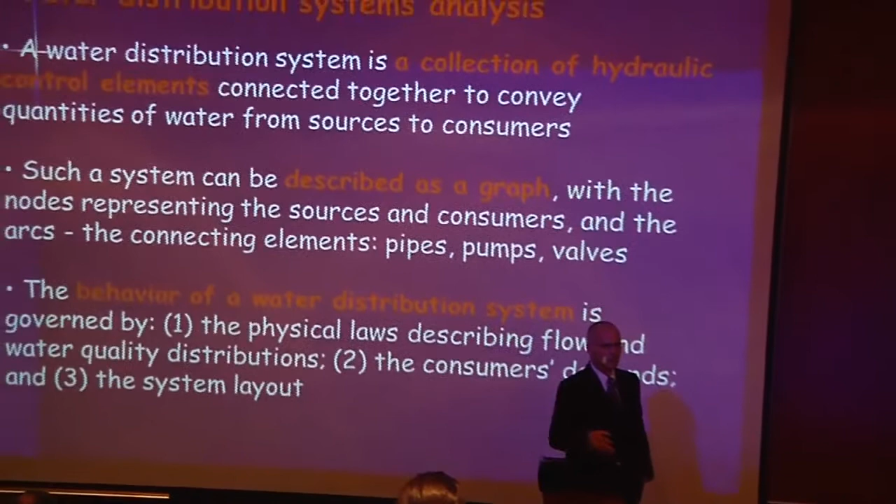If you're thinking about a water distribution system, you can think of it as a collection of nodes and links which are connected together. And this is not just water distribution systems, any system which has nodes and links can be described as what we call a graph. You can think about a transportation system which looks like this, an electrical system, almost any system.

Now, if we think about the behavior of a water distribution system, how does such a system behave? Again, this is also quite general. When we want to model a system, we need to look at the physical laws which describe flow and water quality distribution. When you look at water distribution systems, compare it to an electrical system - you will need to know a little bit about current, voltage, and other things. If you're designing something connected to transportation, you will need to know a little bit about vehicles and loads of vehicles and stuff like this.

The second thing that we need to know when looking at water distribution systems is something about the consumers' demands, which drive the way water distribution systems behave, and we need to know the system layout.

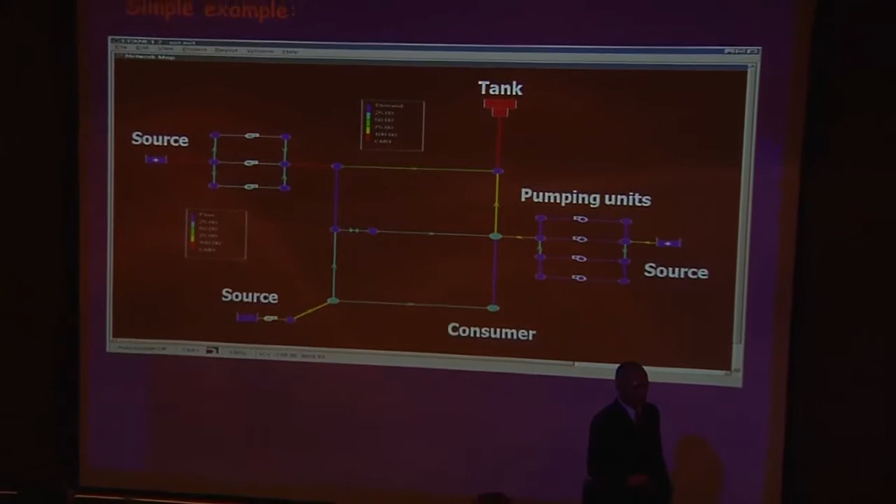Now here is a simple example of a water distribution system, which is very simple, but actually has all the major components that a water distribution system has. So we have here storage, we have here, say, three sources. This, for example, can be an aquifer that is taking water from groundwater. This can be a reservoir, or an aquifer that is taking water from here, and here another one.

We can have a storage tank that fills during low tariff hours and supplies water when tariff hours are high. You can also add reservoirs which supply water by gravity. I was yesterday at the utility supplying water to Bogota, and I'm aware that most of the sources for Bogota come by gravity and by surface reservoirs. So we have pumping, different consumers, and we need to manage this system. Again, that's a toy example, a very small one, but yet quite general.

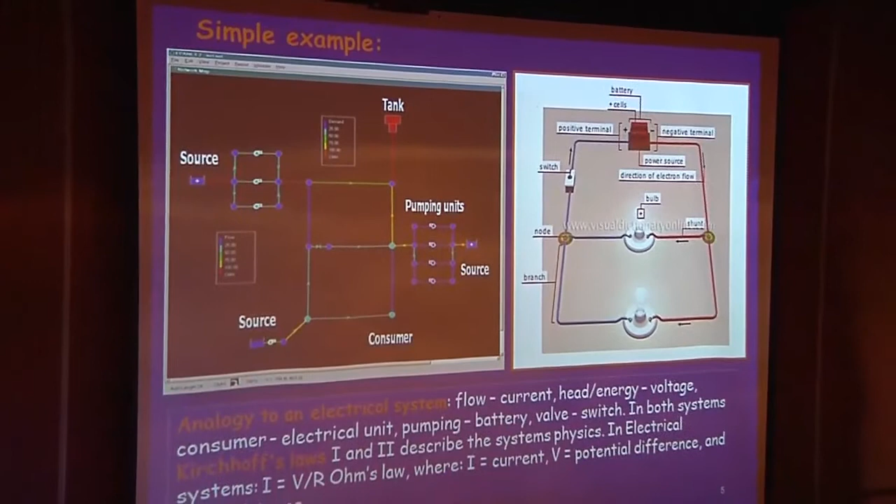Now, if you think a little bit about a water distribution system, and if you think about an electrical system, what's the difference? Why are water distribution systems more challenging to manage than other systems, at least from the perspective that I'm showing here?

First of all, everything connected to flow and head. In water distribution systems, we have the Hazen-Williams equation, or the Darcy-Weisbach equation. Those are nonlinear equations, much more difficult than if you're looking at an electrical system, where we have Ohm's law, which is much easier to incorporate because that's a linear system.

Now, if you want to apply anything on a water distribution system or an electrical system, we need to follow the so-called Kirchhoff laws number 1 and 2, which I hope you remember. One is for mass continuity and one for energy continuity.

So what is the uniqueness or the differences between water distribution systems and electrical systems, for example? Why are water distribution systems more complex? Here you can see there are 3 differences that I'm mentioning.

One is, as I said, the nonlinear head-flow relationship. So if you are looking at the energy in the system, it will go to Q, or the flow in the system, at the power of 2 or 1.852.

We have storage in the system. We don't have storage in an electrical system, at least not the way it's working in water distribution systems, and we have water quality issues. So usually, these days, we are not just looking at problems connected to flow and energy or head. We are also looking at problems connected to water quality, like free chlorine, turbidity, contamination coming into the system, anything connected to the water distribution system, because what we would like to supply is a good service to the customer, which is not just the quantity and the pressure, but also the water quality. That's a prime objective.

Now here's a little bit of a technical figure. What you see here is a very famous water distribution system test problem that was first used by Alperovits and Shamir in 1977. Again, the details are not very important. What you see here is a constant head source, like a reservoir sitting high above ground level. Here you have 6 consumers, and the problem is to design the system at least cost. So you want to know what the pipe diameters should be so that the cost of constructing the system will be minimum, and of course you have different demands in the system.

The system is relatively easy because it has only one source and is fed by gravity. You don't see any pumping here. But if you look here, this is the head at one of the nodes, node I, and this is the other head at node J. You can see here the nonlinear relationship between flow and the difference in heads, and that's the resistance of the pipe, which takes into consideration the pipe diameter, the friction coefficient, and the length of the pipe.

Now, when you look at such a system and you want to design it, to find the optimal solution, flow might reverse. So you might think the flow should go from this node to this node, but when you end up, the flow might reverse. Because of that, you have an absolute value, which from an optimization point of view makes the problem very hard. That is because if you are using any optimization methodology, you might get discontinuities because of this absolute value. Now, what you see here on this figure are two decision variables that we are using, and this is like the response function. So every point here is a possible solution.

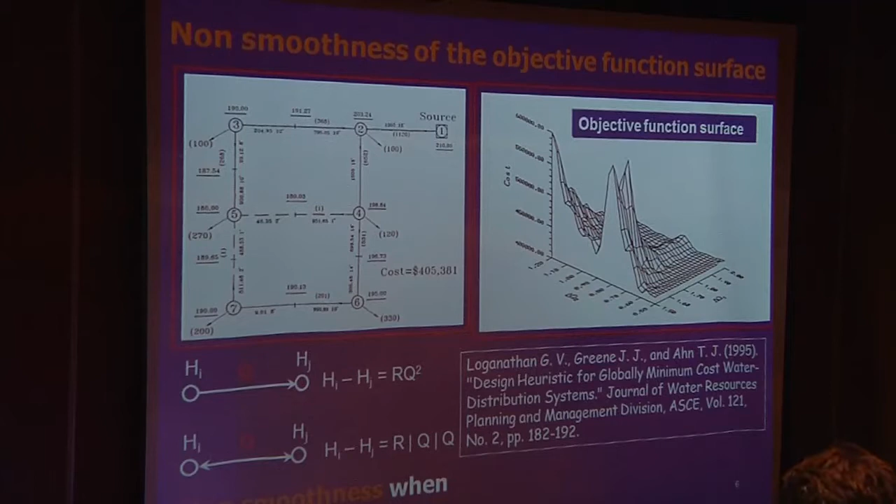Now I'm showing this figure, which is coming from this reference from Loganathan in 1995, Loganathan et al. What I would like to emphasize here is that the surface on which you are looking for the optimal solution is extremely not comfortable. It's not easy. It's like imagine that you are looking here for the lowest value on this surface.

And you need an optimization model that will lead you to that direction. And this is because you have this absolute value here that is connected to the fact that flow might reverse. Now this is only one part of the entire story. The other part is if you're looking at this system and also looking at water quality issues, it's not just that you have an absolute value, you can also have discontinuities. Because if flow is reversing, and this is a set of equations of a mass balance at a node, if flow is reversing, then the entire set of equations is changing.

Now, we would like to do everything. We would like to do flow, we would like to do energy, we would like to know water quality. But this is what we are facing. This is a system that we need to work with. So just to emphasize that water distribution systems management from an optimization point of view, from a more theoretical point of view, is not an easy task.

And because of that, at most utilities, what people are doing - and I was quite impressed yesterday when I went to Bogota and the water utility, and I saw the decisions are being made by results of a simulation model. That's very nice, because a lot of times where I've seen people making decisions connected to water, they make decisions differently. But the fact that you are looking at a simulation model and you say, okay, I would like to do something, what do the simulation models tell me? And you have confidence in that simulation model, that's very nice.

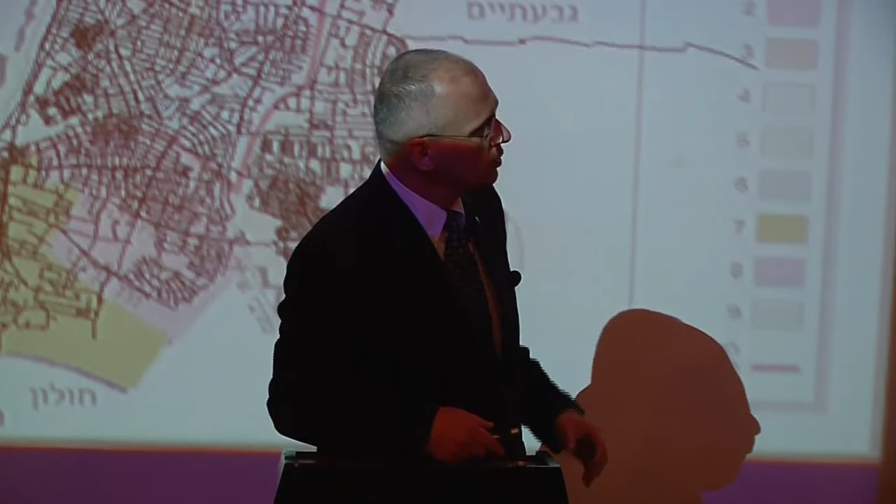This is Tel Aviv, where we did a study. This is about 100,000 nodes and 100,000 links. Now, of course, you don't necessarily need to look at each tap, you don't need to look at each pipe in the system. But those are the systems that we are looking at and we need to manage.

Okay, now this is a very important figure. That's not a technical figure. That's a figure that is actually giving a map, the way that I'm looking at different problems which are connected to water distribution systems. So this is like an overview on what can be done in water distribution systems and what already has been done. And when we come to the end of my talk and talk about challenges, then I will go back to this figure and we'll talk a little bit about challenges, things that have not been done yet on water distribution systems, or where gaps still exist.

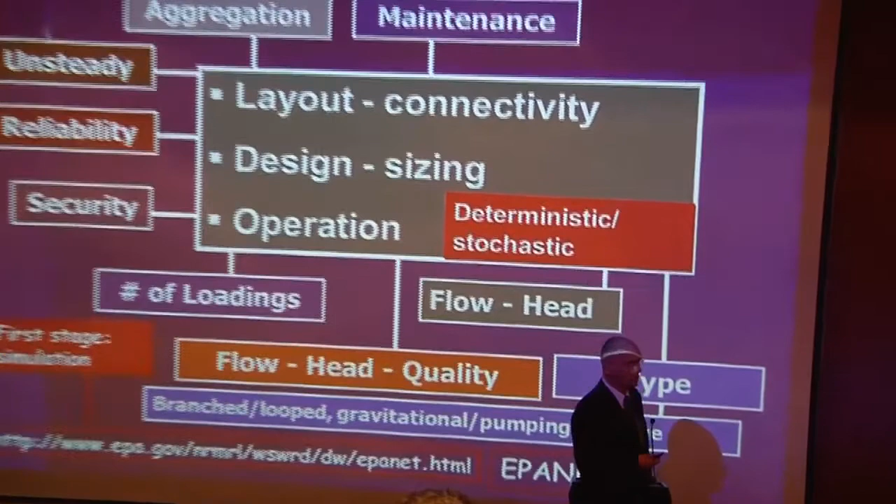Now again, this is from an academic point of view. If you look at people who are doing this in practice, then a lot of things that have already been done in academic institutes still need to be absorbed in industry. And it takes time. One of the things that water utilities have, they're extremely conservative, and that's okay, because they are responsible for supplying water at adequate pressure and water quality. And once a decision is being made, that's not a game. I mean, you're supplying water, which is a very important commodity.

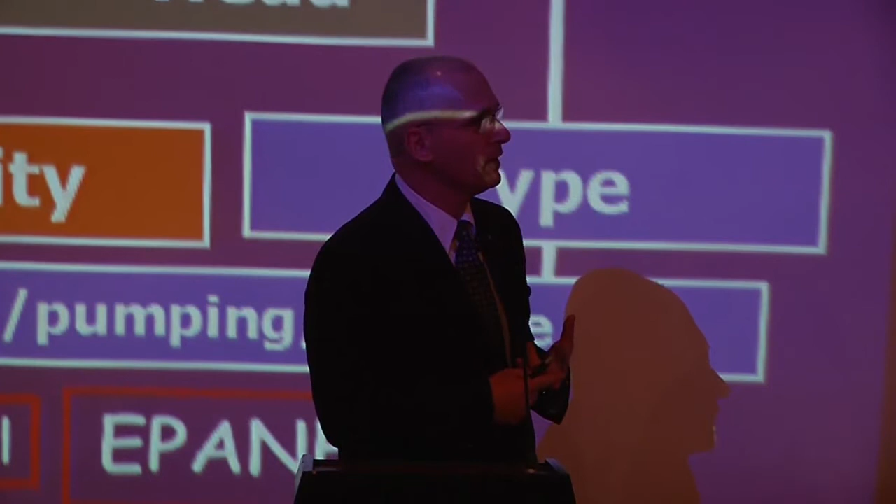That's obvious. Okay, now if you look at this map, I'm partitioning this map into three sections. One is problems which are connected to layout, connectivity - which node should be connected to which node. So if you have a water distribution system and you want to extend it, then the problem is connected to layout. Once you have the layout of the system, you need to decide on designing the system. What should be the size of the pipe? What should be the maximum power of the pump? And if you have a tank, what should be the volume of that tank? So you need to size the system. And after you do sizing, you're thinking about operation - how are you going to operate the system?

Now, when you operate the system, and when you're designing the system, it's not just cost. Most of the time, cost is not the most important issue, because it's not just a problem of cost. Most likely, the main thing you need to cope with is reliability. How do you supply water reliably? How do you construct and operate a water distribution system in a reliable way?

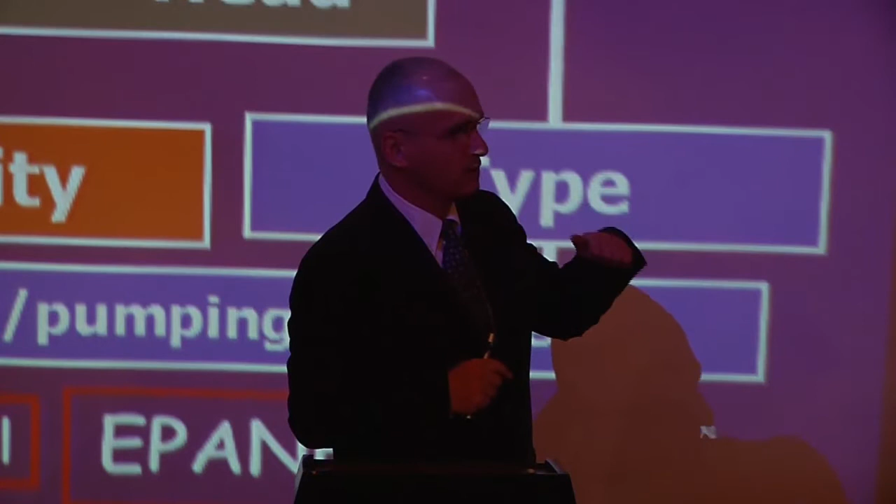So those are the three levels. In reality, there is only one level, everything is connected together. But if you want to think about it as having layout, design, and operation, then it's easy to memorize it this way.

Now, if you're looking at all these three problems, there are different problems adjacent to it. We'll come in a moment to deterministic and stochastic. You have problems connected to flow and head. You want to supply adequate water demands at minimum pressures.

You have different types of water distribution systems. You can have systems which are branched - if you have agriculture, you don't need any loops in the system. Branched systems are very cheap because you don't have loops. But if you're looking at an urban water distribution system, you need loops because you need the ability to supply water to consumers from more than one direction. So systems might be branched, they might be looped, they might be gravitational, just fed by gravity.

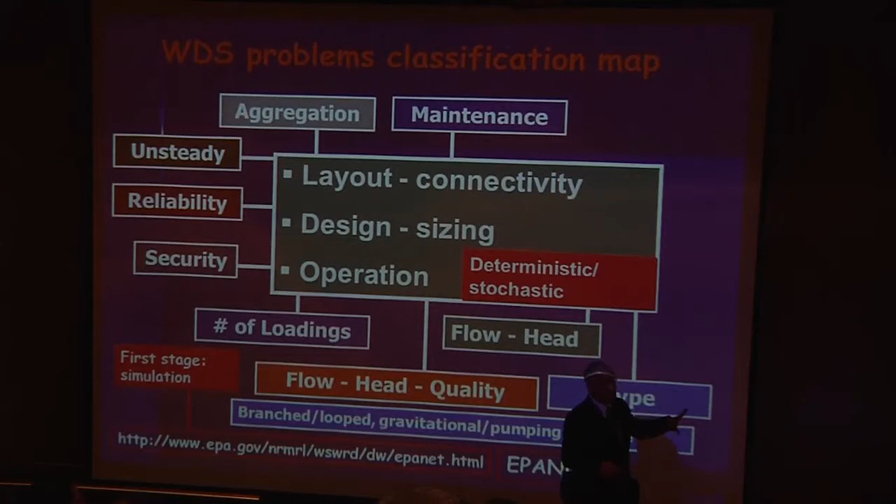And they might have pumping, and they might have storage in the system itself or not. It depends - for example, the water distribution system in Tel Aviv has no storage in the distribution system itself. Everything is supplied by gravity out of the system, and there is no storage within the system itself. So it depends, you can cope with different types of water distribution systems that have these categories.

Now, you can look at flow and head. You can add also water quality. As I said, nowadays we are looking at flow, head, and water quality. The water quality that is supplied is a prime issue to consumers.

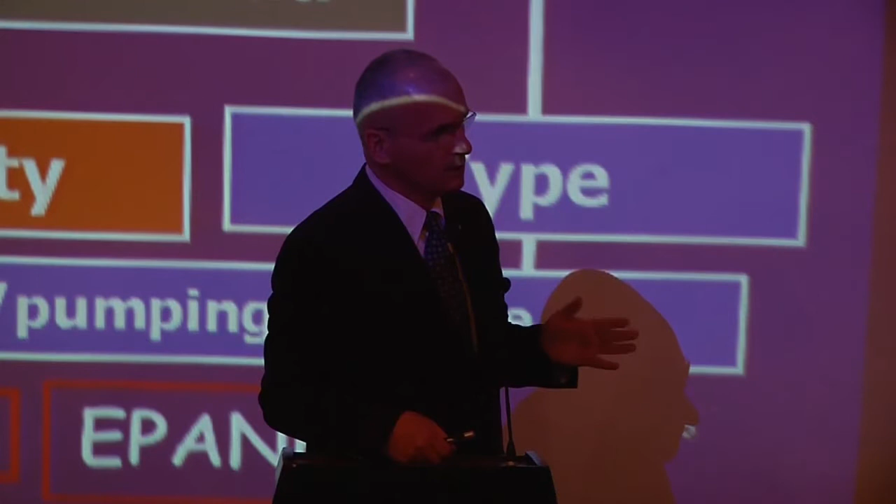You can look only at one loading condition. For example, most design, when looking at a master plan, pipes are selected by looking at just one or two loading conditions - an average loading condition or an extreme loading condition - assuming that if the system works for extreme loading conditions, it will work under any other condition. This might be true, but sometimes it's wrong. So it depends how many loading conditions you take into consideration. Now people are looking more at the so-called EPS, extended period simulation, which looks at loadings changing over time. So the number of loadings, you can take one or more.

Now, what you see here are different problems connected to water distribution systems. Maintenance - which pipe are you going to replace and when? What are the priorities of maintenance? What type of maintenance are you going to do in the system? Yesterday, when I was in Bogota, I've seen that - that's a big problem. What priorities are you going to place for maintenance? What pipes are you going to replace? What pipes are you going to strengthen, like doing a parallel pipe to an existing one?

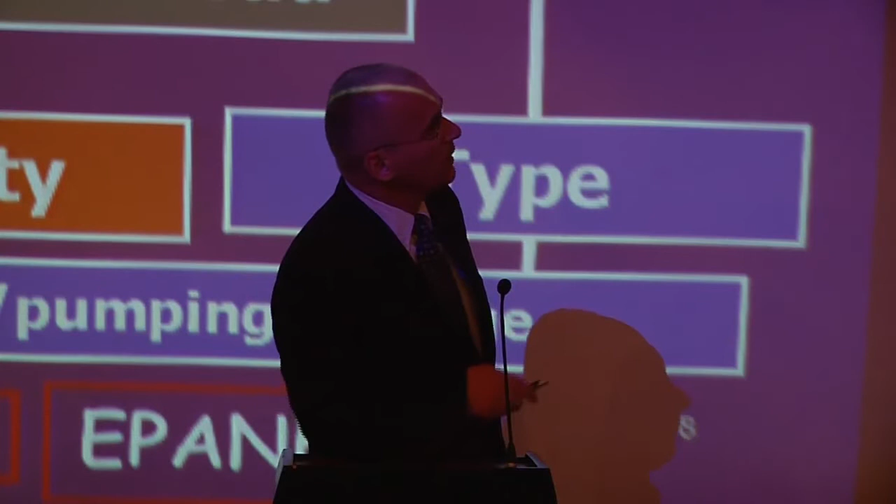You have problems connected to aggregation. So if you look at the Tel Aviv water distribution system, you have 100,000 nodes and 100,000 links that we have modeled. But do you really need such a detailed model? Perhaps you need a model which is much more aggregated, much smaller. It depends what you want to do.

If you want to do, for example, an optimal operation model, then perhaps it's not very important to look at each tap. But if you look at a water security problem connected to contamination moving in the system, then it might be very important to do a very detailed model. So aggregation is another problem. We'll come in a moment to this one.

Reliability - how do you supply water in a reliable sense? How do you define reliability? We'll come to this in a moment with one of the examples. And of course, reliability and cost are two competing objectives. Obviously, if you get a system with minimum cost, it will be the lowest in terms of reliability.

If you are willing to have higher reliability, you need to invest in extending capacity. If you want to extend capacity, it costs money. But then the system becomes more reliable.

Another example is storage tanks. Tanks need to fluctuate between minimum and maximum, but if you look at how systems actually operate, tanks are not fluctuating. They're not fluctuating because operators like to have the tanks full, because if something happens, they have a backup.

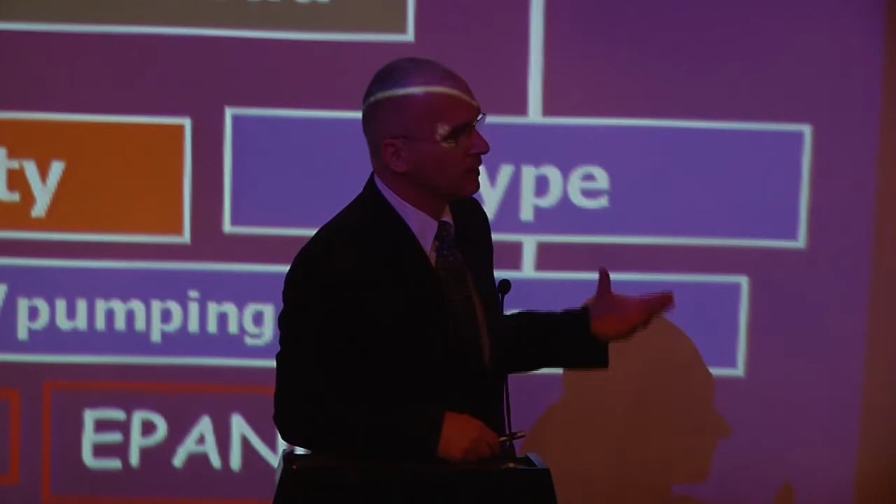Security, water security, is driven to some extent—perhaps the most important driving factor—by the 9/11 events. And people have started to worry about what's going to happen if a contamination might enter the system, either deliberately or non-deliberately, just accidentally.

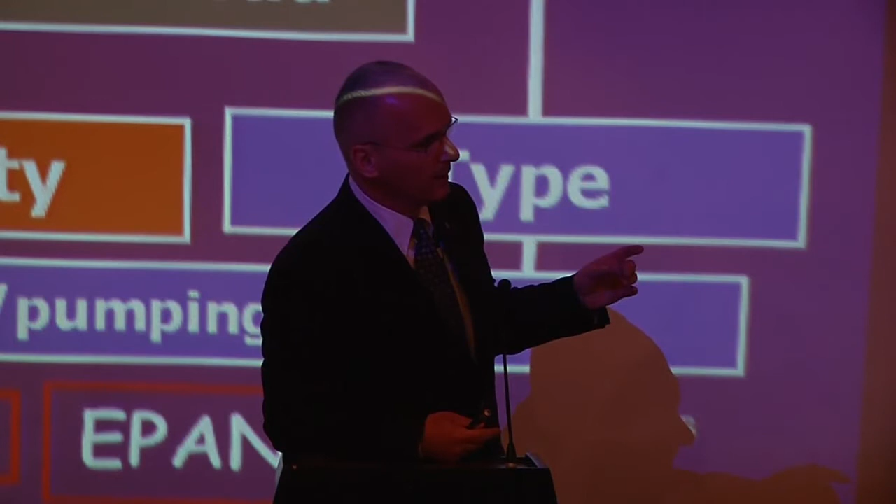In Israel, for example, there are a few examples of contaminants that have entered the system, not deliberately, but accidentally, and still it happens. For instance, there was one case in which fuel had to be filled into a specific tank, and the operator selected the wrong connection. So instead of filling the fuel tank, he injected fuel into the distribution system, and people started to feel that they were drinking water with fuel. That was really a proof of concept. Anyway, this is connected to security.

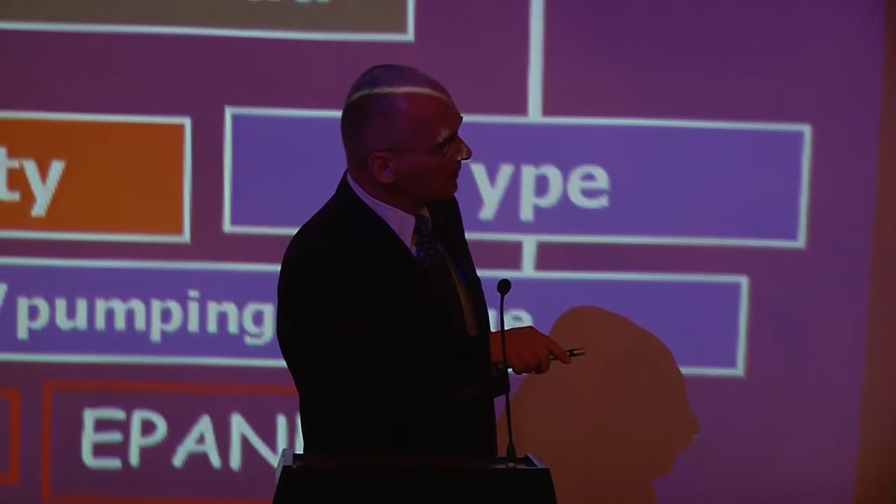Now, all the things I've said here are connected to deterministic assumptions—that you know the demands in the system, the consumptions. But you don't really know the consumptions, you just know them in a specific range. One other thing that's missing here is leakage, which doesn't appear in this picture. That's also a problem, or non-revenue water, which can be managed by different activities, like managing pressures in the system and doing valve closures or valve operations, and things like that.

But going back to this, the assumption is that everything is deterministic, when in reality everything is stochastic. You don't know exactly what the demands are, you don't know exactly how consumers are going to react. So if you want to take those into consideration, things become much more complex if you want to manage a water distribution system.

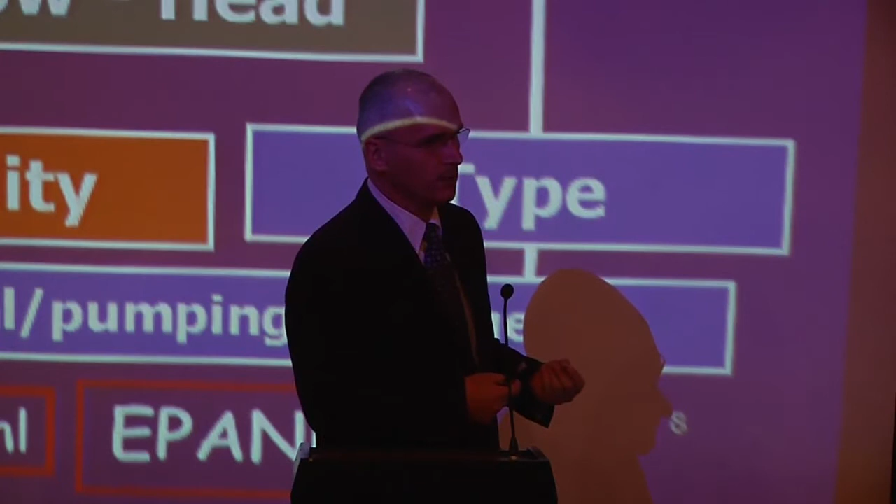Now, the first thing you must be able to do, no matter what system you're looking at—a transportation system, an electrical system, a building, whatever—is to simulate the system. So if you look at different scenarios, like replacing a pipe, or suddenly there's a burst in one of the pipes and it breaks, you need to be able to simulate the system. Reliability, for example, is incorporated in practice by looking at different scenarios: what's going to happen if that pipe breaks, how the system is going to operate. So what you do is simulation.

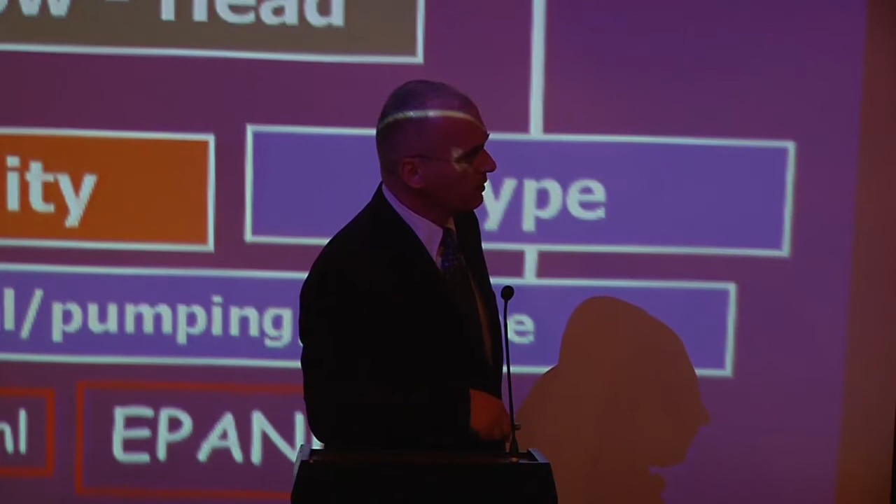So you're doing simulation, and there's no way to talk about optimizing a system if you're not able to simulate it. Optimization is not something I'm necessarily advocating. What I'm trying to say is that if you have a problem with a set of solutions you can enumerate, you don't need any optimization—just look at all the solutions and select the most appropriate one. So you need to be able to do simulation, and this is just one reference, EPANET, which became very famous since it was established in the early 90s.

So that's a major program, freely available and very, very successful.

Now, this is a map of different problems connected to water distribution systems. Now we have those problems. How are we going to solve them? What I'm referring to here is problems that we would like to optimize, to do some sort of optimization.

When we look at a problem where we're optimizing something, we have an objective function that we are trying to minimize or maximize. We might have more than one objective function if we're looking at a multi-objective problem, like reliability and cost. And we have a set of constraints that we want to fulfill.

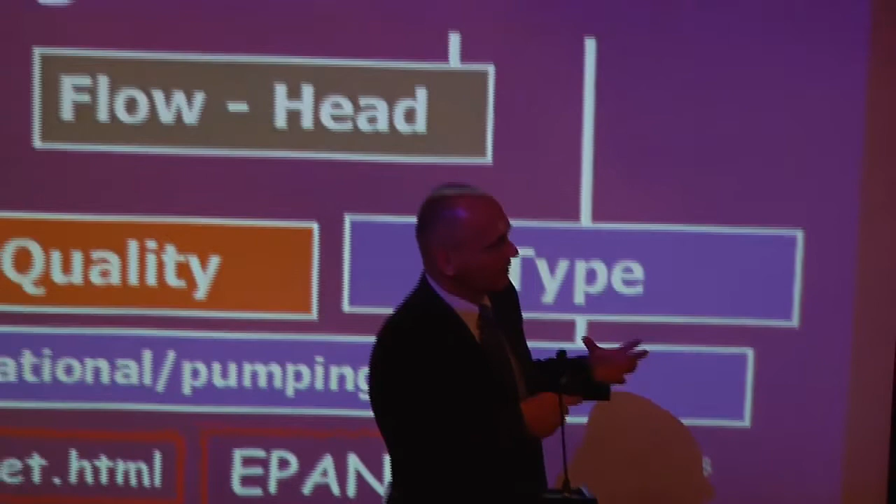So how can we do this? Here are three methods, or three category methods, that I will focus on with the examples I'll show. The first one is embedding.

If the problem is really simple, you can simply write a linear programming model. A linear programming model means the objective function is linear, all decision variables are at the power of 1, and you have a set of constraints which are linear equations. LP, or linear programming, is extremely popular, extremely efficient, and if you have a problem that you can cast into a linear programming model, then that's great. Do it, and you have a very efficient way of solving it.

For example, the problem of least cost design whose layout is branched can be embedded as a linear programming model. This goes back to 1968 — there's a famous paper by Karmeli et al. that invented this idea.

The other thing which is very popular now is the so-called linking. What do we do in linking? We have two stages. One stage is simulation, running different scenarios. At the upper stage, we have a heuristic methodology — people have been using genetic algorithms a lot since around 1994. Those two levels talk with each other.

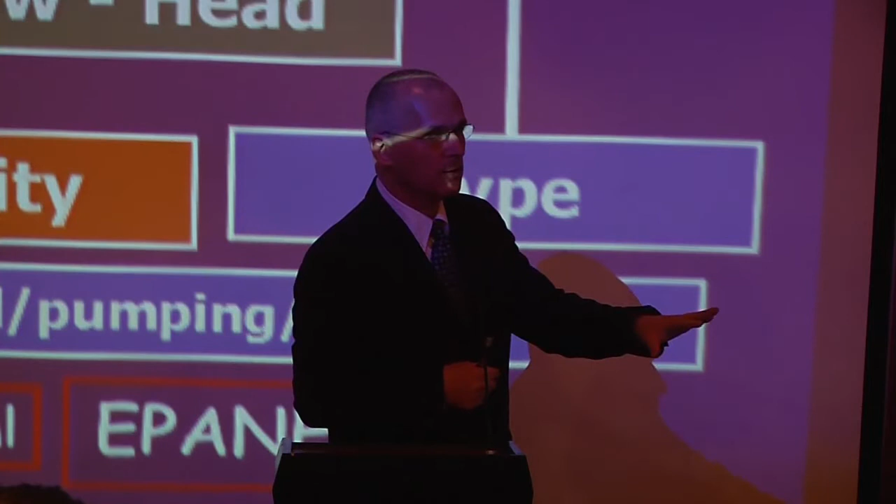On the other hand, which is worse, is that everyone doing a genetic algorithm is a bit neglecting the thinking on how to solve it using an embedding approach. Hybridizing is just a way to try to simplify the simulation stage.

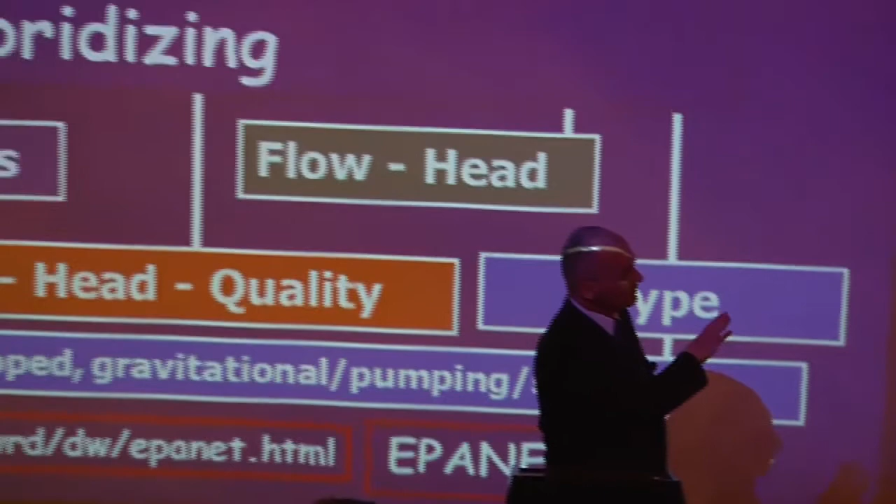So I think this slide is probably the most important one in my talk, and if you observe some of it, then I've done my job. Okay, so that's a map.

I will show now 3 example applications that try to demonstrate parts of what I've shown here. Excuse me.

Anyone interested to see a bit more than that, just a moment. If we go back to this example, I was engaged in almost everything connected here — for instance, aggregation, number of loadings, flow and head, water quality and aggregation, everything. I haven't done anything on maintenance, but I've done unsteady reliability and a lot of things connected to security.

So what I'm trying to say is I've selected 3 example applications that will demonstrate some of the things I've shown here. But if you want, just go to my website — there's a list of 87 journal papers. You can go there and pick any one to look at, and everything is open.

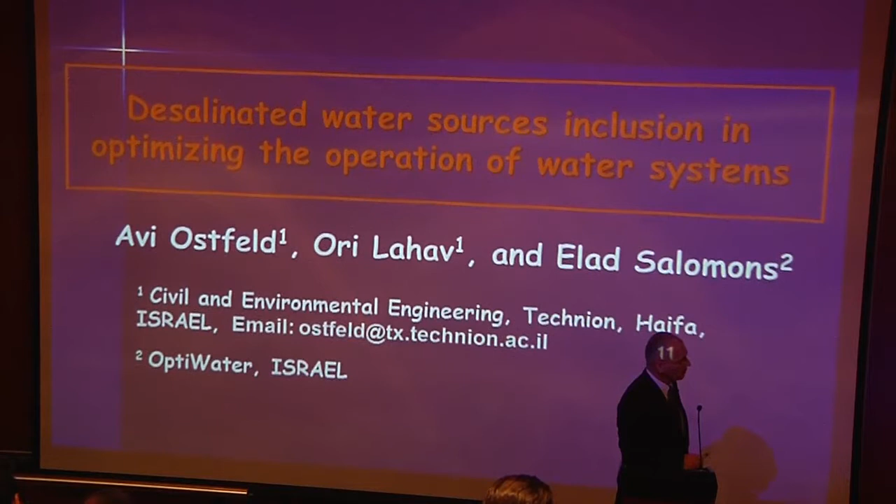So this is me. I would like to acknowledge Ori Lahav, a faculty member in civil and environmental engineering, and Elad Salomons, who is working with me for quite a while, a private consultant. If you want to look at more details, this is the reference you need to read.

A little bit on introduction, objective, decision variables, constraints, methodology, example application, and conclusions. Now, this presentation and the 2 others that will come afterwards are to some extent technical. All the technical issues I will leave aside, I will skip them. We'll look at them just in a glance and keep moving forward, because those are technical things. Anyone who wants to look at those more in depth can do so, but that's not the most important thing.

So in terms of introduction, what are we solving? The problem here is the following: you have desalinated water on the shore, you have surface water, you have groundwater, and you're mixing them in the same water distribution system. Because of that, you might have very difficult, very severe problems which are connected to water quality, not connected to contamination, but connected to water quality issues because the stabilization of the water is different.

Water that is coming, desalinated water, has almost no minerals. On the one hand, groundwater and surface water has different properties, and when you mix them, you can have the so-called red water.

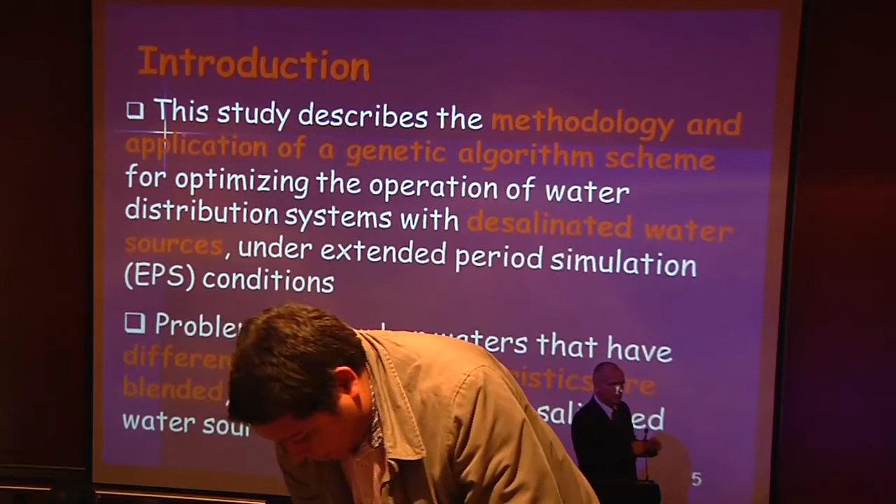What is red water? I think that all of you have experienced this. If you go out of your apartment and come back after a vacation or something, and you open your tap and you have that brown water coming out, that's red water. Because everything that is attached to the pipe, or some parts attached to the pipe, goes into the water fluid and comes out at the tap.

So problems occur when waters that have different chemical characteristics are blended, and especially when desalinated water sources are present.

What has been found is that what we need to take care of, or what characterizes the stability of water, is the so-called CCPP, or calcium carbonate precipitation potential. That's a chemical property of the water that we need to control to be at a positive level. And when desalinated water is blended with groundwater, even if both sources have a positive CCPP value, you can still get the phenomena of red water.

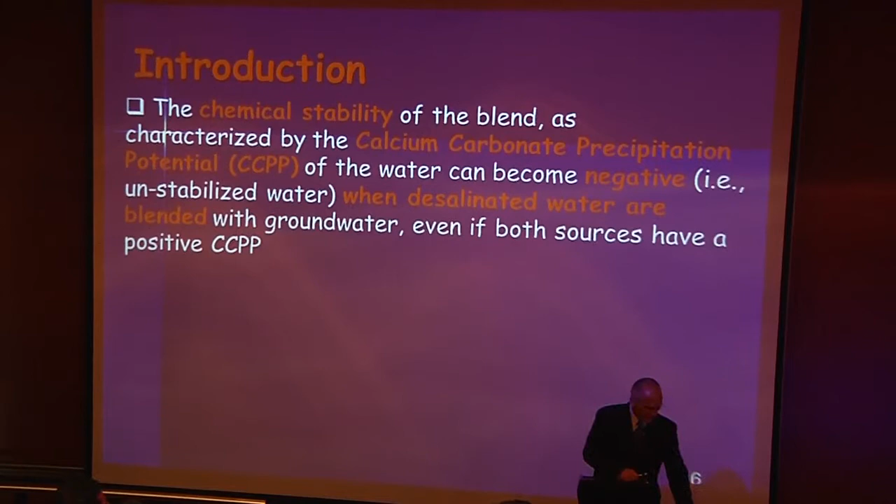So that's the phenomenon of red water that I just mentioned, and we would like to control this. We built a model with the following objective, decision variables, and constraints, and we solved an optimization model.

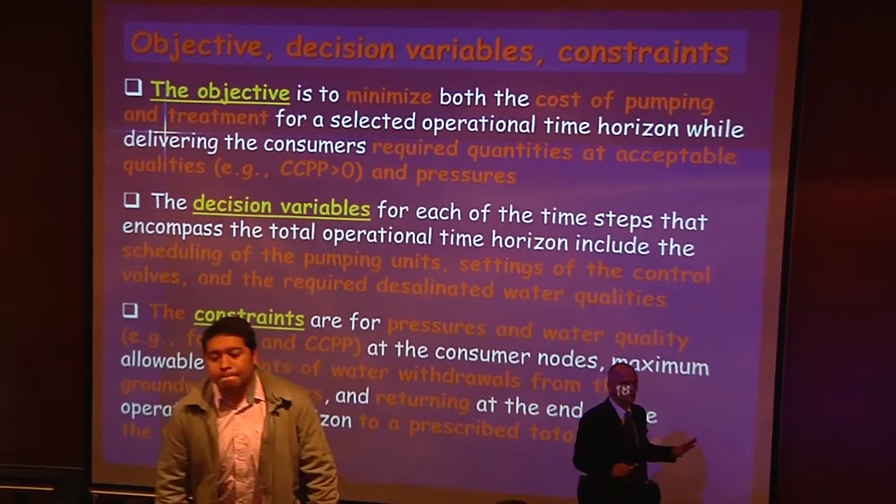Now, what I'd like to emphasize is that even if you're not solving an optimization model, if you're just doing simulation, think about what you want to accomplish, what are the decision variables. For example, I'd like to accomplish reliable water supply to consumers. What are the decision variables? Where to place new pipes and how to operate the valves. What are the constraints? I need a minimum pressure at specific nodes in the system, and I need to maintain a minimum water level at the tanks. If you think along these lines, it makes things easier to absorb and creates order in the way you think about problems.

Going back to this problem, the objective is to minimize both the cost of pumping and treatment, while looking for a positive CCPP. Decision variables are connected to how you hydraulically operate the system, and to what extent you treat the water at the desalination plants. Constraints are connected to pH and CCPP, which assure water quality that will not cause red water problems. We also have constraints connected to the hydraulics of the system, that is minimum pressure and levels at the tanks.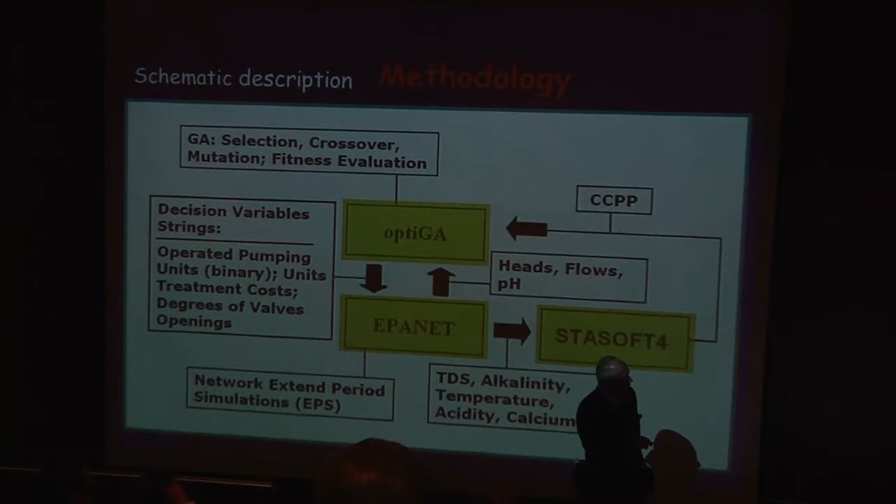For example, OptiGA, the genetic algorithm, gives the simulation different operating pumping units - a binary of which pump operates at which time, the unit treatment cost, degrees of valve opening, and things like that. EPANET gives back the solution, and OptiGA gives down a new set of decision variables.

This software, STASOFT4, simply does the chemical analysis, and we'd like to maintain CCPP and pH. If we get solutions that are not feasible, not fulfilling the constraints, we give them a penalty. This is extremely typical in solving complex water distribution systems, and there's already available software for doing this, because it's extremely robust in terms of receiving solutions. But again, the price is the computational effort.

Now here are just two screens of a program we developed for doing this - the genetic algorithm inputs and the way that the problem looks like. Not very important.

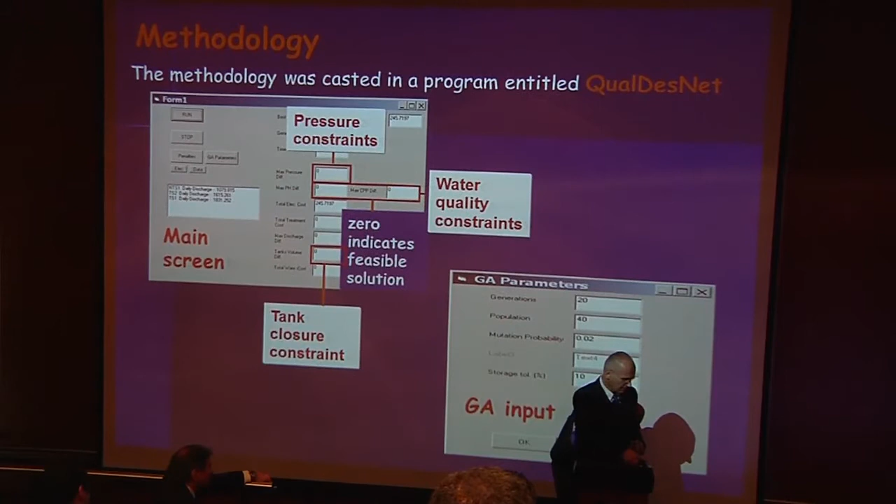Speak slower? Okay, let's see if this is working. Let's continue. I've never felt so important, I must admit.

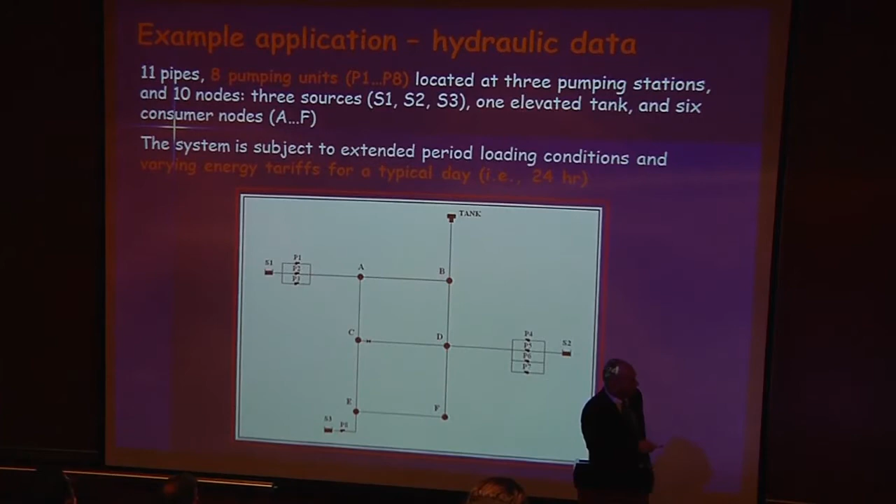So what we have here, this is the main screen with different water quality constraints, and this is a genetic algorithm. Here is an example application - you see it's a small example. We have three pumping stations here, and six nodes. That's not a real water distribution system, but it captures the idea of incorporating everything.

We have here three sources with three different water qualities - this is like a groundwater source, this is a desalinated source, and this is a surface water source. Again, those are technical details connected to the running, which is not very important.

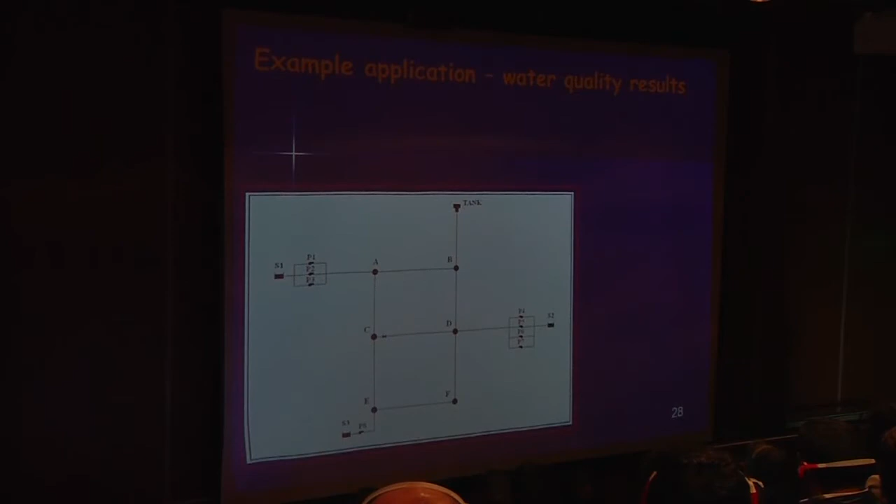This is the water quality. Here you see this is CCPP, one of the water quality parameters, and you can see that you will receive minimum CCPP values. So those constraints are binding.

We'll come to this in a moment because this is again very important. We are doing sophisticated optimization, genetic algorithms, ant colony and other things. But again, we are solving engineering problems. Now, how can we know that the solution we are receiving is optimal? The answer is we cannot. We cannot know that the solution is really optimal from a mathematical point of view.

But is it really important - the answer, in my opinion, is no, it's not really important. What is important for us is to improve existing solutions.

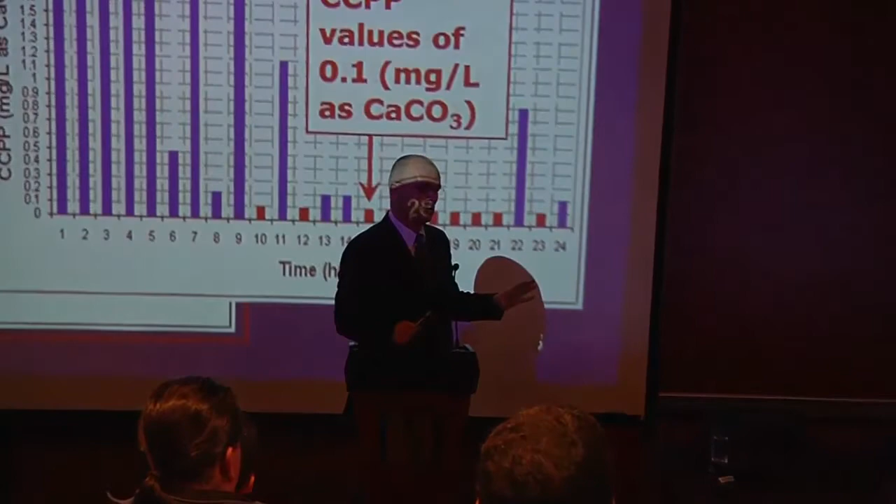So if you have a water distribution system that is pumping - there is an example in Israel - water is pumped from the shore to Jerusalem, and the elevation is really high, about 400 or 500 meters over a very short distance, and energy is really a high issue. So if you're able, through optimization, to reduce the amount of energy you're consuming just by 4 or 5%, then you're saving lots of money.

Is this really an optimal solution? Who cares? You're saving money. So that's very important in the way one should think about solving these types of problems. Now, how can we say or know that a solution is good? There are different heuristics that I've written here, the way I'm looking at this, which can give you a clue whether what you are doing makes sense or is correct.

The first one is to be very close to binding constraints. Here is another example: if you have a problem of minimizing construction cost for a water distribution system, and you have constraints on pressures at nodes, at least at one of the loading conditions, at least at one of the nodes, you should be very close to the minimum pressure.

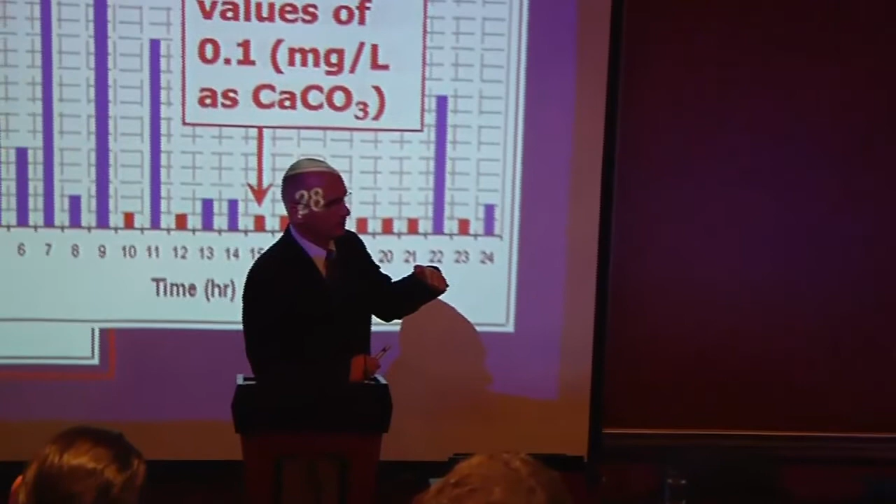If you are not close to the minimum pressure, that's fine - you have a feasible solution, a solution that will work. But is that solution going to be minimum? Probably not, because if you have a pipe which is very large, if you reduce the pipe a little bit, you will increase the friction losses, you will get a reduction in pressure, and the entire system cost will reduce.

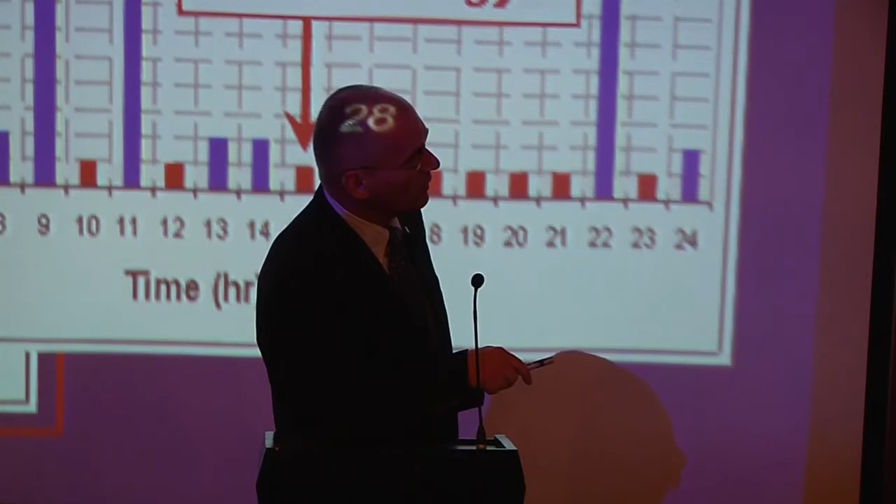So proximity to binding constraints is very important. Now, the other thing is the way the solution is behaving. If you look on one hand at the objective function, and on the other hand at your iterations, or the so-called generations in genetic algorithms, solutions usually progress not in a continuous way, but in a stair-like case. So you need to see if this is the way it works for you.

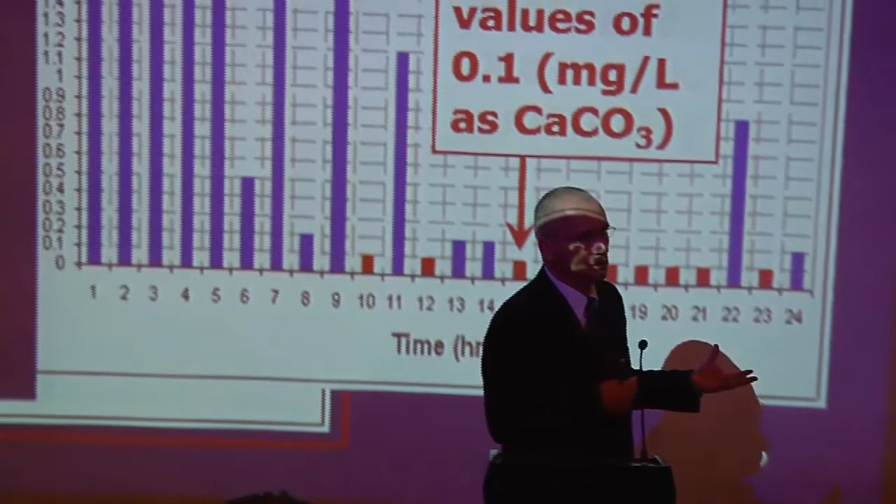The other thing is converging to the same local solution at multiple runs. So you can run the model once and again and see whether you are always approaching the same solution, or a nearby solution. This can give you confidence that what you are doing is correct.

Proximity to boundary constraints, we have already mentioned. And very, very much important, the last point here, which is engineering judgment.

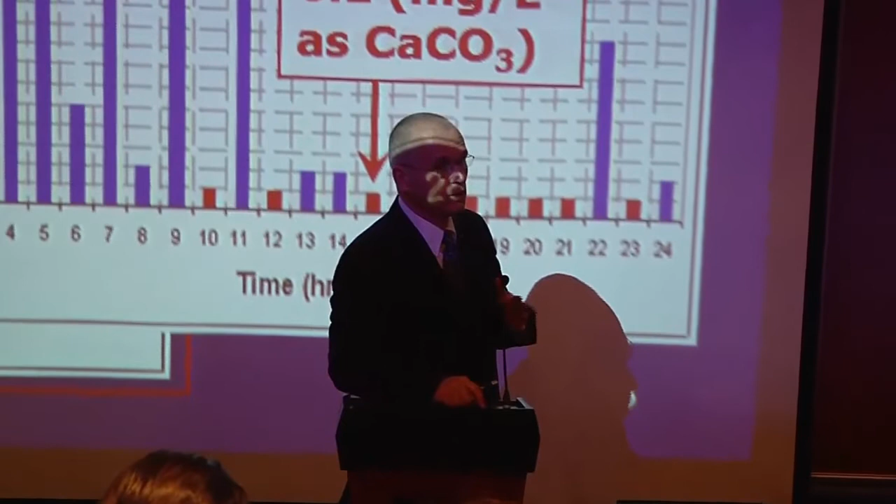Just look at the solution and see if it makes sense. Sometimes the optimization doesn't look at everything in series, we cannot look at everything simultaneously, we're just looking at one problem. But if you cast an optimization model and everything is solved simultaneously, the optimization model might lead you to solutions that you have not been thinking of. On the other hand, you might have an error in the model. So engineering judgment is extremely important here when you look at the final solution.

Okay, so in terms of conclusion for this example, that's just an example of looking at water quality problems, injecting water quality connected to water sources with different water quality stabilities, and trying to solve a model which incorporates everything, the hydraulics and water quality, in one framework.

So that was example one, and we have done different cases. What I've shown here is just one case we've implemented in another water distribution system, and it's open to anyone who wants to use it as a model to balance between water cost and water quality. So this was example number one.

Now we are moving to example number two. Example number two is connected to reliability of water distribution systems. So this is the title of this talk, but the main issue is connected to reliability, which is a very complex problem still. It is complex even from the beginning.

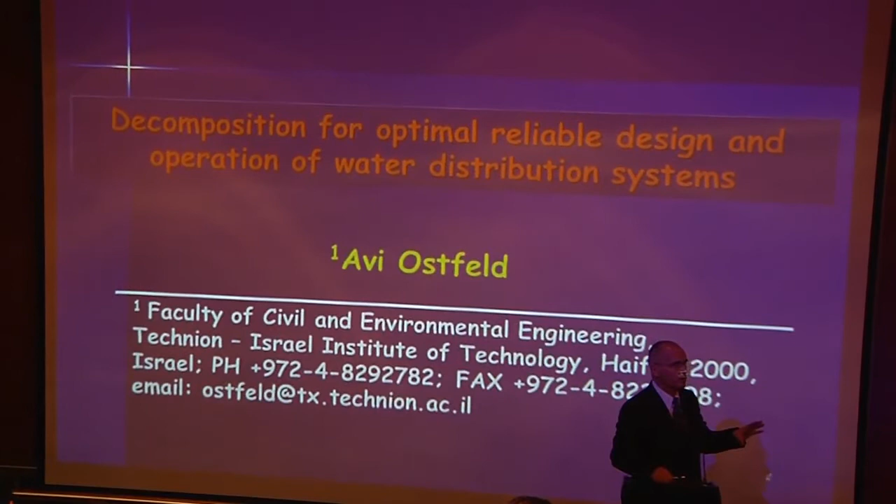How do you define reliability? What measures are you going to take into consideration? If you have a measure of reliability, how are you going to build a model that will fulfill that reliability measure?

For example, say the reliability of a water distribution system is that you are guaranteeing the consumer no more than 2 hours of shortage in a year with a probability higher than 0.98. This is like a return period in hydrology, if any of you are familiar with that. So say this is a measure of reliability that everyone is happy with.

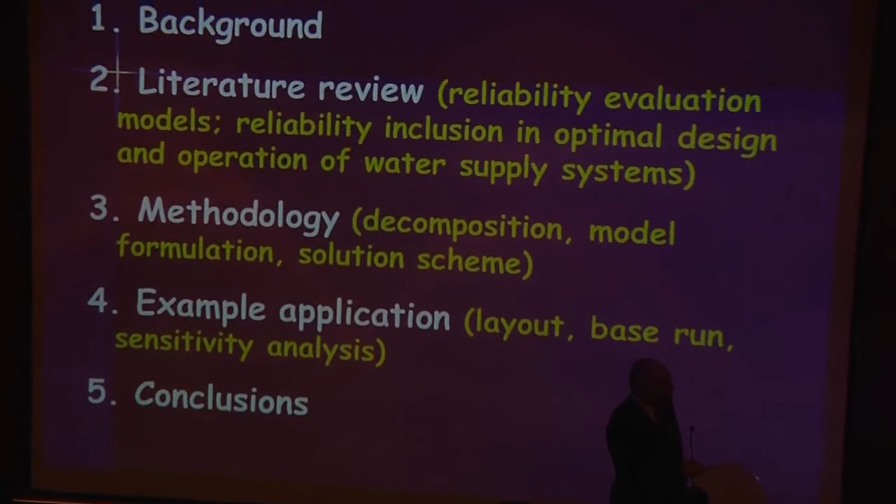How are you going to implement that? That's a problem. Here is the reference for this paper, published in Water Resources Research. Again, if you want to look at all the technical details, they are sitting here. So here, a little bit of background, literature review, methodology, example application, and conclusions for this example.

As I said, reliability is a probabilistic measure of system performance. People will say the system is highly reliable, but if you talk to them a little bit more and ask what do you mean by reliability, it's always a problem. The challenge is to transform that general definition or measure of reliability into computational tools that will be able to solve problems and maintain a reliability measure.

In terms of literature, there are two types of models that have been evolving connected to reliability. One is reliability evaluation models. Remember, when we started, I said you cannot do any optimization if you're not able to simulate the system. So reliability evaluation models are models trying to simulate the system in terms of reliability.

Generally speaking, if you want to know if the system is reliable or not, you need to run a lot of randomization or Monte Carlo simulations and see how the system is working. In practice, what people are doing most likely is looking at different scenarios, the most critical ones, and seeing whether the residual capacity, what is remaining from the system after something fails, is still able to cope with consumer demand. So those are reliability evaluation models.

The other thing is, once you have reliability evaluation models, how are you going to incorporate them into design, into least cost optimization models for design of water distribution systems? So in terms of reliability assessment or evaluation models, those are references, again, if you want to have a look or look at those more closely.

Analytical methods are connected more to the probability of two nodes being connected. But in a water distribution system, the fact that two nodes are connected is only a necessary condition, not a sufficient one, because even with a connection you might not have the hydraulic tools to supply water—the head at the reservoir might not be at the right level, or the pumping unit might not have enough capacity. So it's only a necessary condition. In electrical engineering or computer science it might be necessary and sufficient, but in water it's not.

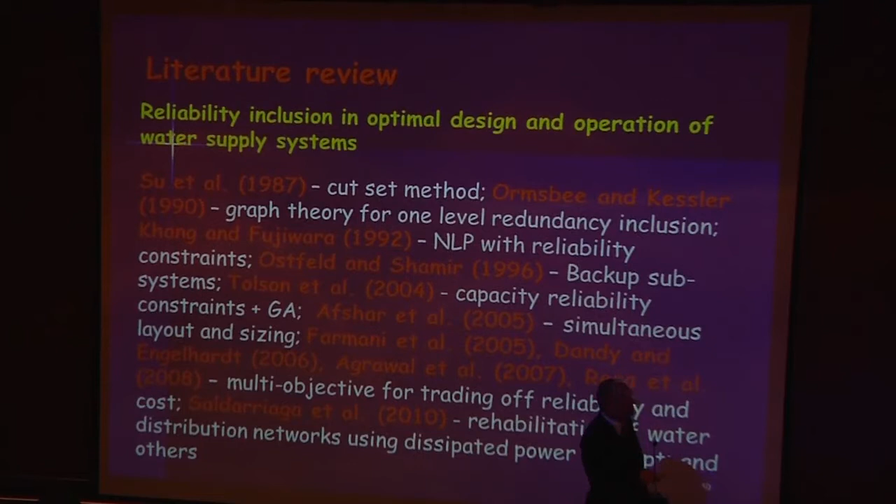For example, there's a multi-objective approach by Reca et al. 2008, trading off reliability and cost. Saldarriaga et al. 2010 connects reliability of distribution networks using a dissipated power concept, and there are others. The literature is full of reliability models.

Now, what is done in practice in terms of reliability? As you know, reliability is still guaranteed by using pipes larger than a minimum diameter, keeping storage in tanks above a specific level, having extra storage capacity, and having extra connections. But there is no explicit inclusion of reliability using these heuristic methodologies.

So what has been done in this model is to incorporate the so-called topological redundancy with residual capacity. The idea was simple: if you look at a water distribution system and impose a load on it, what is the load? The load is the demand.

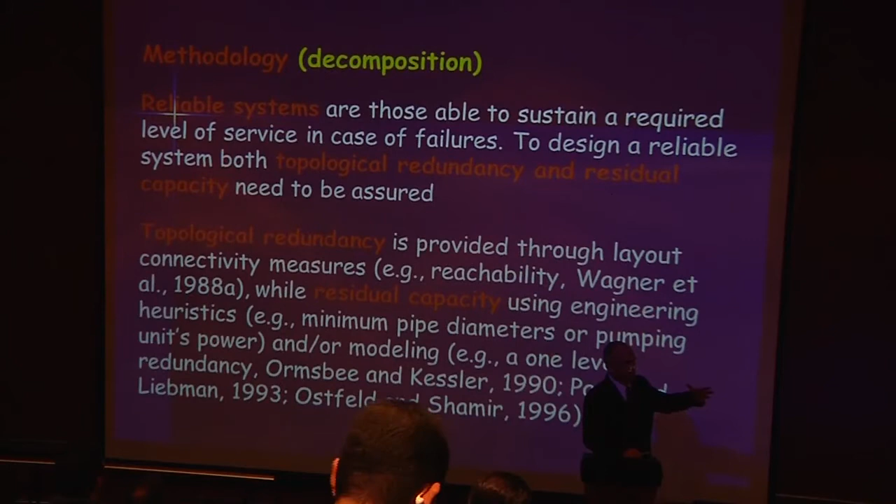You can look at the demands at present or in the future. You impose those loads and design the system, getting the set of diameters, the set of pumps, the maximum power of pumps, the volume of storage—everything. But if you increase that loading, you'll get the same layout, but the pipes will increase and the pump capacity will increase. Everything increases, so if something fails, you'll have the residual capacity you need.

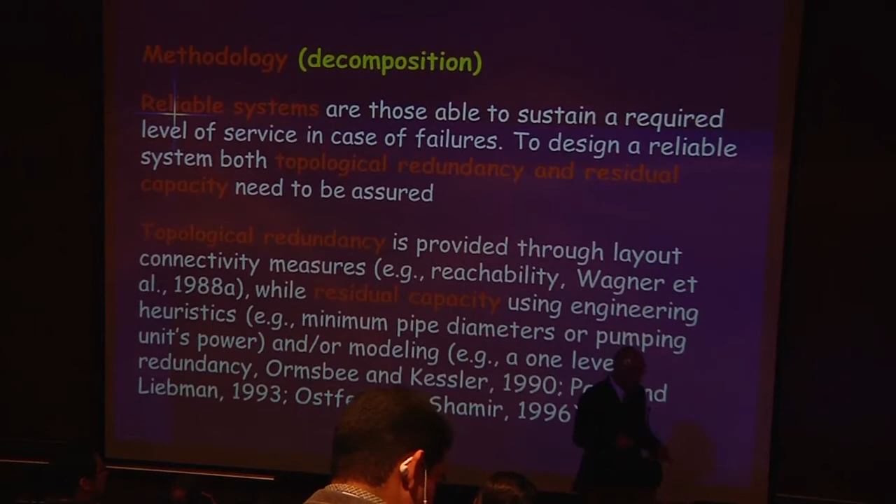Now the problem is, what loading conditions do you select? The idea here is to do two levels: one is to impose virtual loadings on the system, not the existing ones, and the other stage is to solve the system for minimum cost. These two levels play with each other, and this is the so-called decomposition, because we decompose the problem into two: reliability and least cost design.

Moving forward—most of this has already been said, but it's written here. We are looking at virtual increased loadings that will give us, on one hand, a system with minimum cost, and on the other hand, a system with adequate residual capacity.

Here's a bit of technical material. This is a decomposition problem we are solving. The first one to start doing this was Alperovits and Shamir—remember the two-loop network figure I showed before. They had the same idea for least cost design of water distribution systems, and here that same idea is incorporated for reliability.

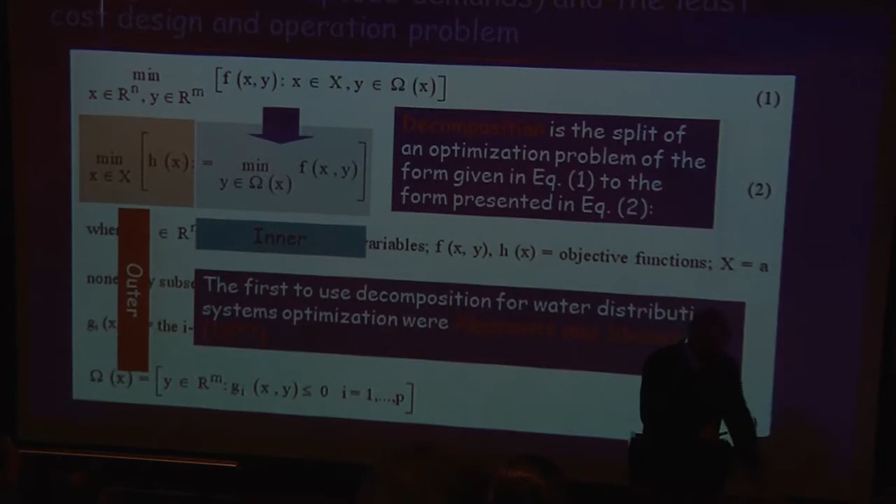This is again technical material, not very important, but feel free to look at it if you want. We have an inner problem of minimizing cost, and an outer problem, which is the loading condition problem. This is the mathematics sitting behind it, again not very important.

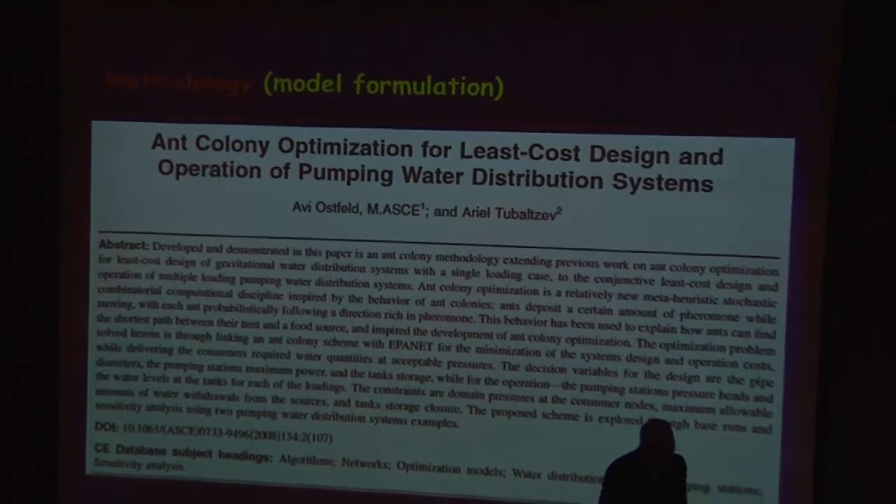So how did we solve it? We used ant colony optimization, which follows the same lines as genetic algorithms. Genetic algorithms try to evolve or imitate the way nature behaves, following the evolutionary principle that the strongest species remains. Genetic algorithms try to follow those lines.

Ant colony optimization follows the idea of ants moving from one node to another. Ants are completely blind, but as they move between nodes they follow tracks of smell. A researcher in Italy named Dorigo developed this in 1992—it's a different optimization model.

There is a reliability evaluation model here. I will skip that.

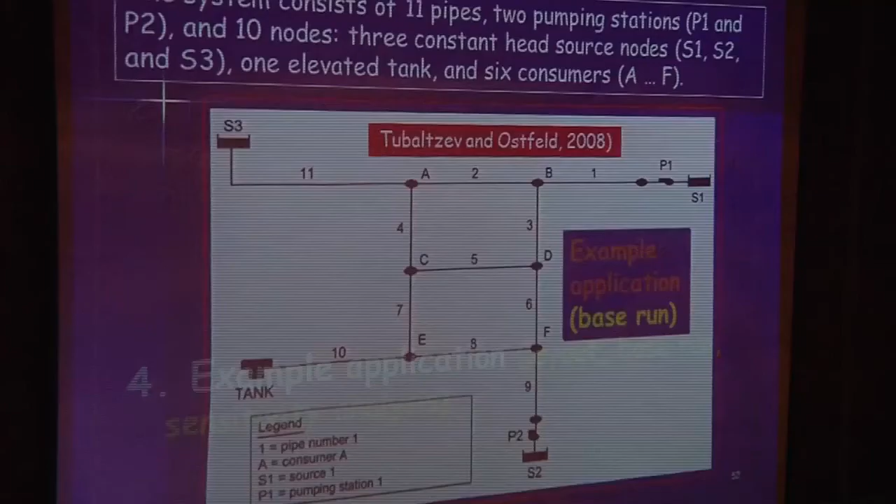We'll go to an example application. Here is an example application which shows the essence of this idea. Again, a very simple example application, but quite general. So again, we have three sources here.

You have a pumping station here, and the idea here is that we want to design the system not just for least cost, but also for residual capacity by increasing the loadings.

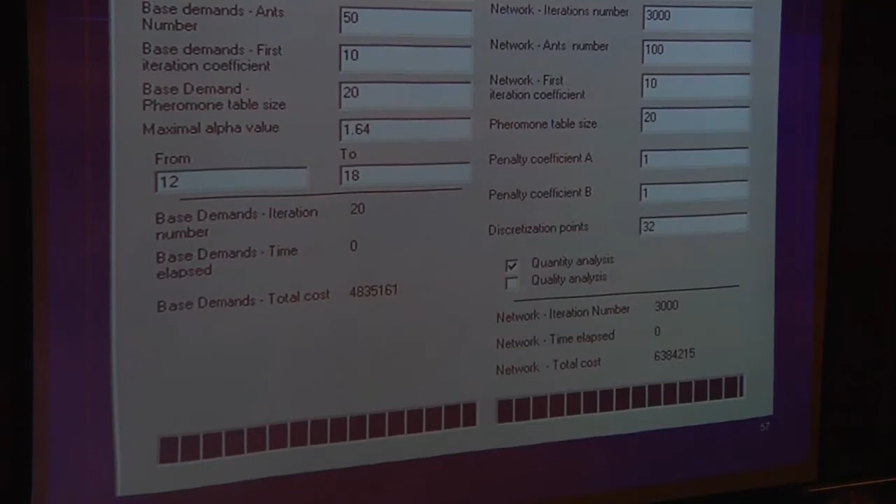This is the program that we have constructed for solving the inner problem and the outer problem, and this is how they are connected. We'll move forward to the results.

So here, what you see, this is the main message that I would like to show here. What you see in black are the diameters that are going to be selected, and those are the pump's maximum power. Those are the diameters.

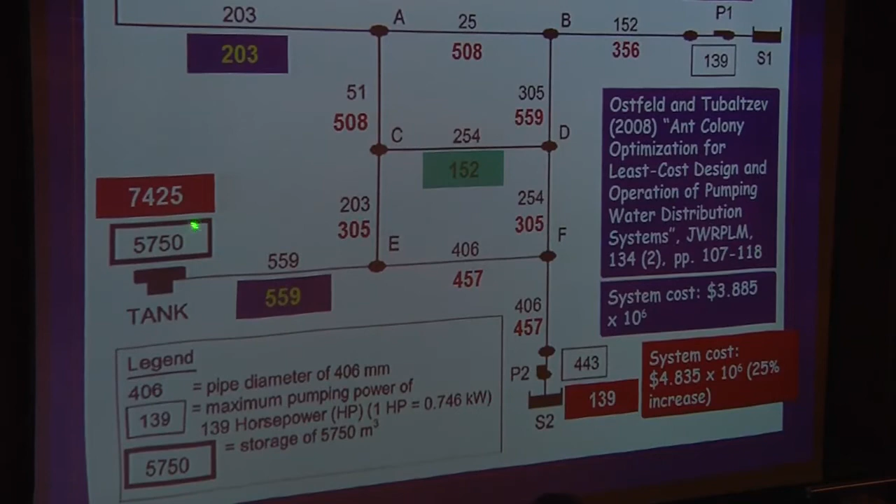This is the maximum power, this is the maximum volume of the tank. This is the maximum power of this pumping station, and this is the maximum power of this pumping station. Everything that you see here in black.

What you see here in red is the expansion of the system. It's like if you're blowing something, and it's really becoming fat. So how fat are you going to blow that system? It depends on the loading.

But since you don't know the loadings, there is an iterative scheme. So what you see here in red, those are the blowed system, or the system with higher dimensions.

Not everywhere. For example, you can see here that this is a diameter that was 254 millimeters and came out as 152. But generally speaking, you can see that everything is increased.

This is the volume with reliability considerations, and this is the new maximum power with reliability capacity. And those are simply the virtual loading.

So, for example, here, the virtual loading here should be 1.16 higher than the normal loadings.

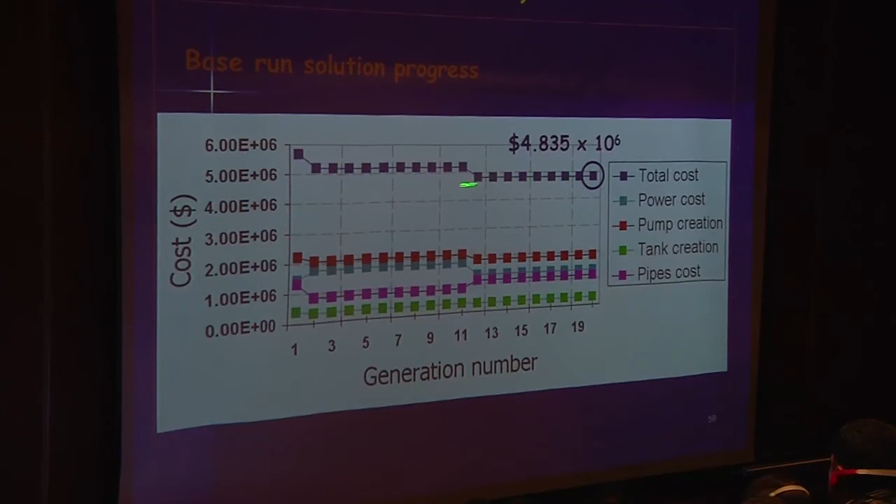And this is a little bit the way that the objective function is progressing. You can see here a little bit what I've said before, the stair-like progression. It's not very dramatic here, but you can see that it's falling down with stairs. It's not falling down continuously.

Those are a sensitivity analysis that we made on the failure duration, on the algorithm, etc. Not very important. Here is a picture which is important.

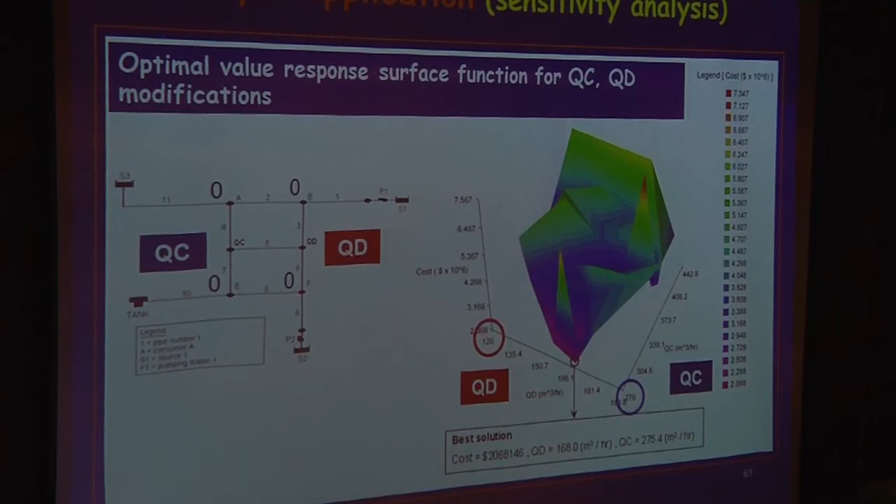We'll move forward. Conclusions are simply that we are using a new direction, what is proposed here, trying to incorporate reliability by changing the loadings on the system and seeking the optimal loadings that need to be imposed on the system to get not just a system with minimum cost, but also with adequate reliability.

Okay, last example. Last example is this one. This is more complex than the others.

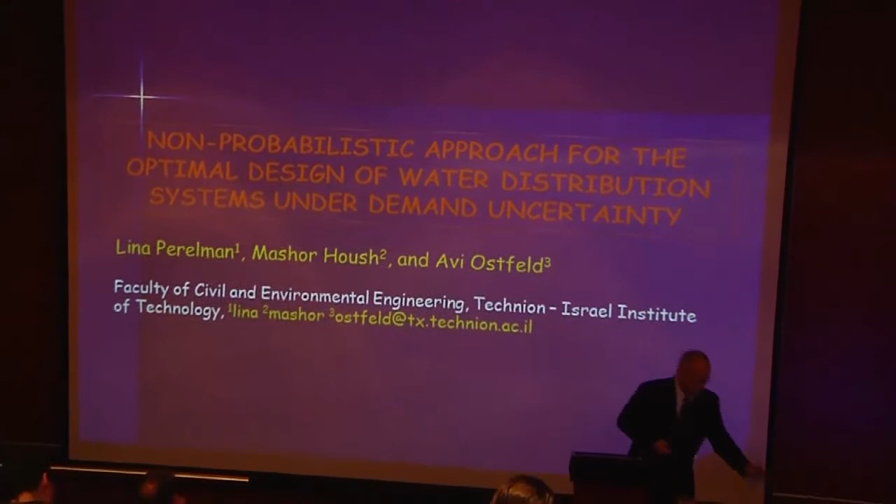This is called, this is about incorporating uncertainty into water distribution systems design.

So when we looked at the map, I said that everything that we are doing is deterministic. But in nature, everything is stochastic. So how are you going to incorporate stochastic features into water distribution systems design?

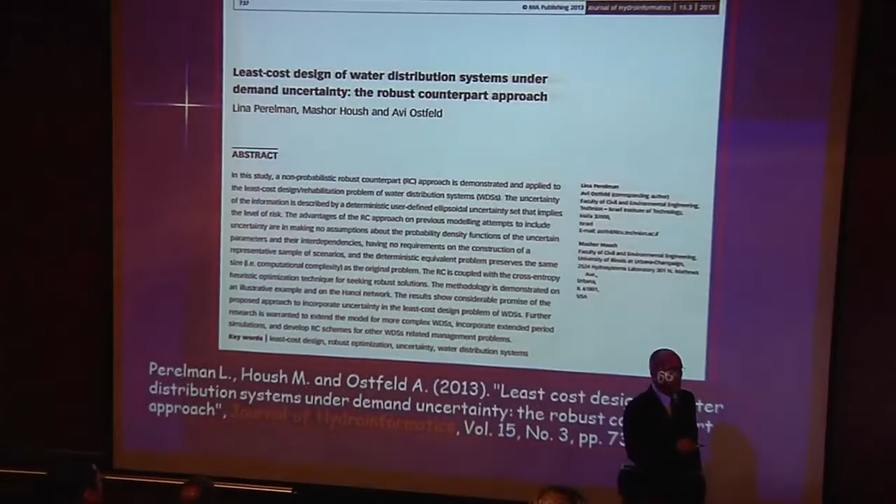There is one which is more advanced than that one that was published in Water Resources Research. We'll see this in a moment, so you can have a look at all the technical details. So here, a little bit on introduction, methodology. We are using the so-called robust counterpart for including uncertainty into water distribution system, and example applications and conclusions.

So what we tried to do is to include into water distribution system uncertainty in the least cost design problem. We try to do this differently than all the modeling efforts that have done that before. So the so-called robust counterpart - I'll move forward a little bit because it has a lot of technical details here on how to do this.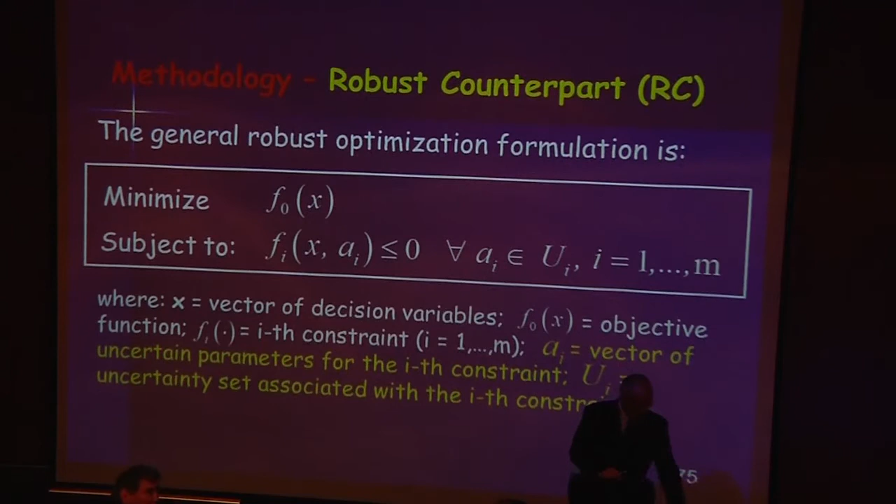We are formulating the so-called robust counterpart. Then we are formulating the uncertainty set, and then we are solving the generated problem. Again, I'm moving forward because that's more technical. Here is something which is important.

If you are looking at these two axes, say for example that this is deviation from mean parameter 2. Say for example that this is demand on the system. So here is demand number 1, this is demand number 2. This is a nominal value, the average value. So if you're designing for the average value, this is one way.

The other way is you might look at the worst case scenario. What is the worst case scenario? That everything is at its extreme - not the average, but the highest loading in the system. That's okay, but if you do this, you might receive a too conservative solution, which will be expensive.

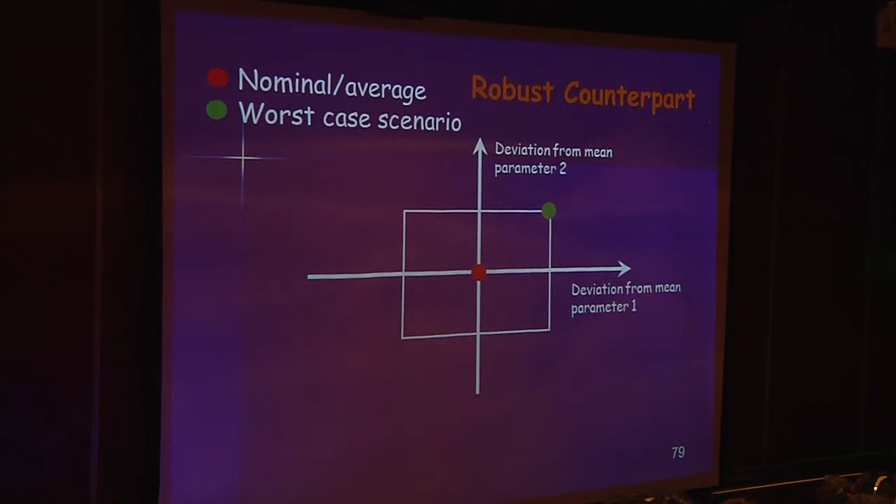So you might do this, but you can also have a robust policy, so you can reside anywhere in this circle or in this ellipsoid. So again, this is the average solution, this is the worst case scenario, but you can reside here at any point. For example, you can choose a demand that is a little bit higher on this axis and a little bit higher on this axis, residing here or wherever you want.

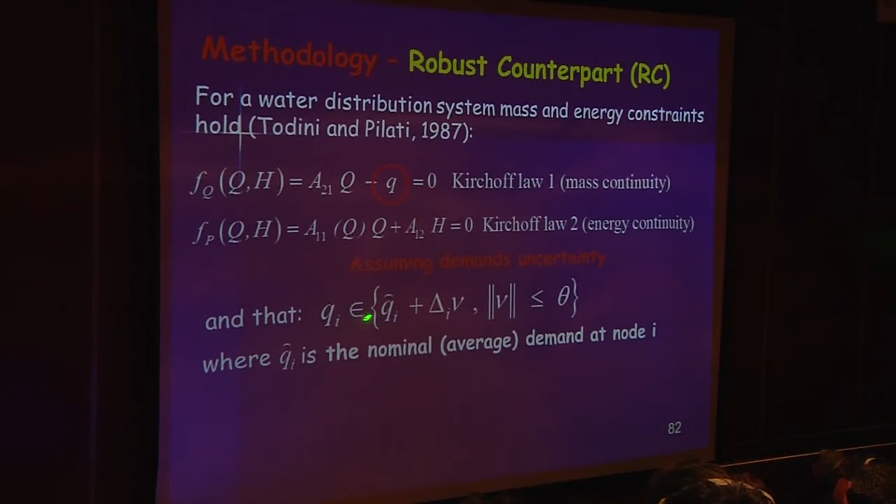Again, this is mathematics on the robust counterpart. With this bottom line, it's not very important at this stage. In water distribution systems, we have two basic laws: one for mass continuity and one for energy continuity. Again, that's mathematics connected to the way we incorporate the robust counterpart, and we'll come in a moment to the bottom line.

So this is what we are incorporating in the model, and it comes out that out of all this complex mathematics, all we need to do is add a component to the demands using theta, which is a user-defined value we'll see in a moment, and the coefficient in the matrix, called delta I, which incorporates an uncertainty set. Again, I won't get into the details of this because that's too much.

So how to compute delta I? This is a little bit on how to compute delta I. Again, I'm moving forward - this can be found either in the paper or better in the book of Ben-Tal et al.

So I'm moving forward, and I'm coming to example application, because this will demonstrate to you what this methodology can do for you, which is very nice. You'll see in a moment.

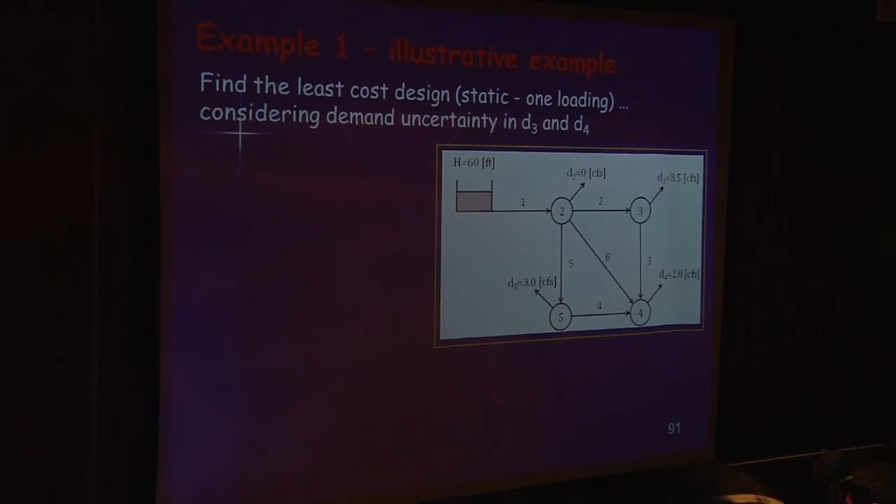So here, for example, you have a constant head source - say that this is a reservoir, and you have here 4 consumers, 4 demands: D2, D3, D4, and D5. So this is, for example, 3.5 cubic feet per second, and this is 2 cubic feet per second.

Say that we are assuming these demands are uncertain, so they are not deterministic - they might be between a minimum and a maximum value. Those are data of the example, again not very important. There is a minimum pressure constraint here of 30 meters at all nodes.

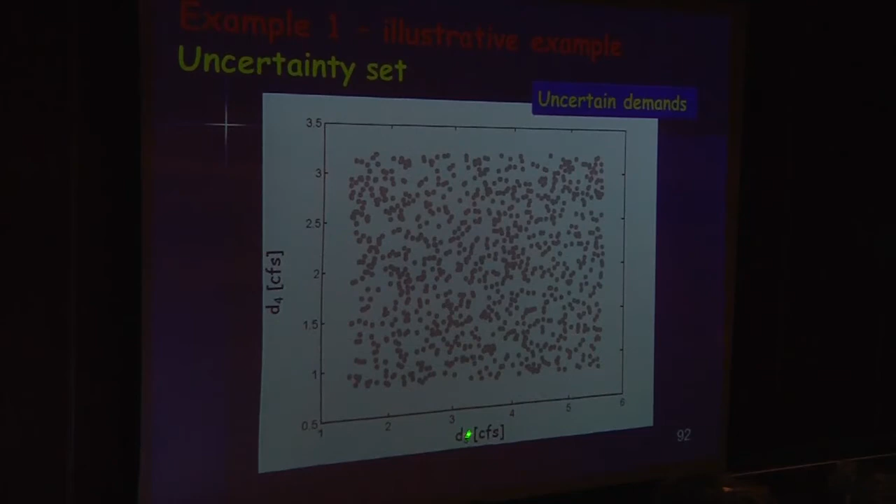And here is the main point. Here on this axis, you can see this is D4 - the demand at one of the nodes in CFS, cubic feet per second. And this is the demand at node 3 in cubic feet per second. Now, if you're taking the nominal value, that's the average value, which is 3.5 and 2.

Now, in reality, you can get any number in a box. It can go to a minimum and to a max. Any number here in this box might be realized when the system starts to work.

So, for example, you say, OK, I'm going to design a system. I have a master plan for a system, and I'm anticipating that neighborhood is going to be very large in 10 years, and we're anticipating that the demand is going to increase by 20%. And we are designing for this. But the demands are not increasing by 20%. It's increasing by 50% because of different reasons - quality of life, more people coming in, whatever.

So if we are designing using the traditional methodology, what we are receiving is the following. Just a moment, we'll look at this one. What I've said before is that we can design the system using different ellipsoids. We'll come to this in a moment. But again, if you are looking here, just a moment.

Again, if you are looking here at the average value of D3 and average value of D4, this is the nominal point. Any point here can be realized in the real water distribution system. So you can have those demands sitting here or here, so you can have scenarios which are different than the ones that you have designed for. So what does this picture say?

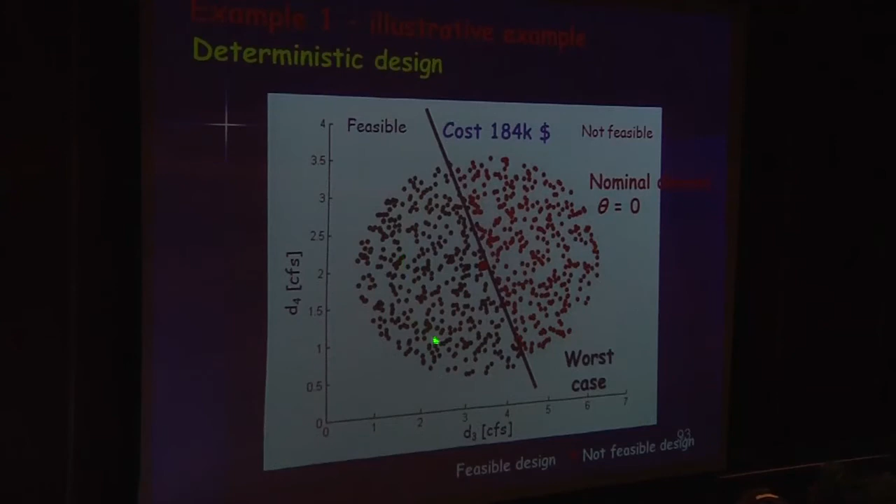This picture says that if you are designing the system with those levels, then all these demands, if those are being realized, the system will not be feasible. You will not be able to supply the consumers the adequate pressures that they were promised to be supplied. Those will be feasible, but those will not be feasible.

Now, if you're using a value from that methodology called theta, which is giving you the uncertainty set on how big you want the uncertainty set to be - if you're taking this theta value, you're incorporating all these demands. The cost is increasing to 241K. Remember that the cost before that was 184. So you're moving from 184 to 241, but all the demands are feasible now. So you can select any demand here in the system, and the system will still be feasible.

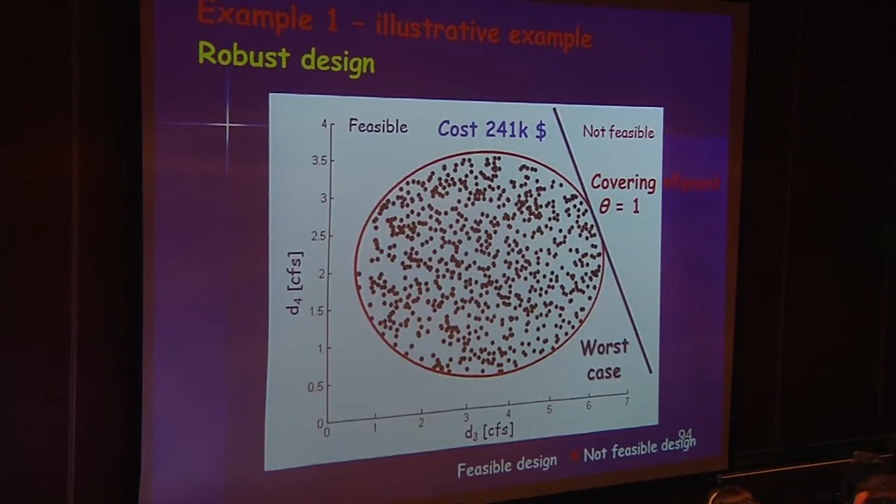Now, the beauty of this methodology is that you don't need to do stochastic simulations. This is only one deterministic model that you are solving. And once you have solved that, you are doing stochastic simulations to check whether your model is working or not. But you're not doing this computationally intensive work of doing so many Monte Carlo simulations and selecting decision variables. So this is very nice, and we'll come in a moment to see what are the limitations of this.

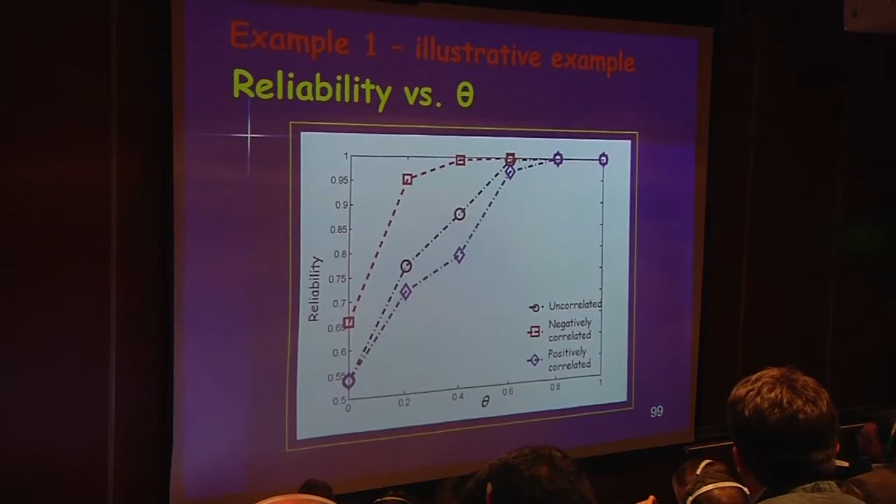So this is a deterministic design. This is the worst case design. And we've done here different things which are connected to the correlations of the demands - I will skip that. This is another trade-off between reliability and cost.

We've done this also on the Hanoi system, showing the trade-offs. I will move forward. Again, cost and reliability.

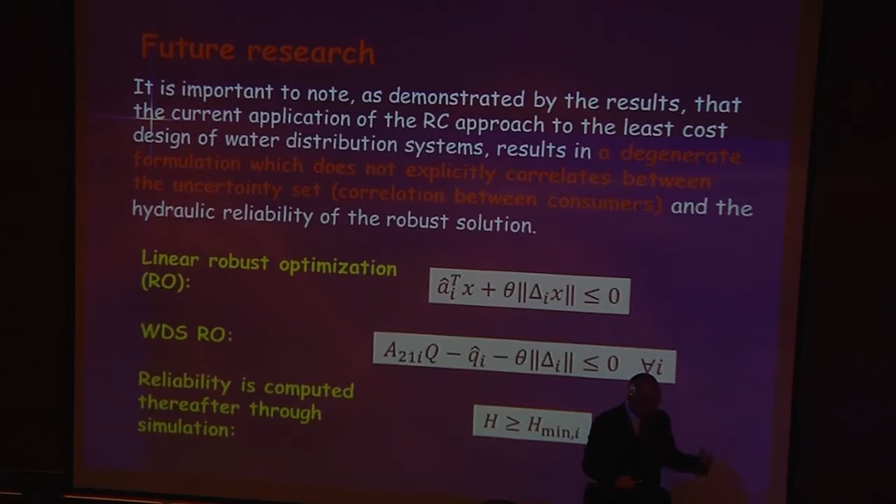Okay, conclusions and future work, which is connected here. The robust counterpart idea is very nice if the constraints are linear. If they are not linear, it becomes a problem. So here we have done something continuing this idea, which is to try to linearize the friction head loss equation. As I said, there is a paper published in Water Resources Research, and if you go to that website you will find it, or you can approach me and I will send it to you. So again, here it's like future research, but this has already been accomplished.

Now we are coming to the last slide, which is challenges. In terms of challenges, if we come back to that figure we started from, everything is here on this slide. People have done a lot on sizing systems, on least cost design of systems. This is extremely saturated, whether you are doing branch system or loop system, gravitational or pumping, trading off cost and trading off different layouts of system and cost.

Also, operation models are quite saturated. Looking at systems for scenarios and looking at scheduling pumping units, that's also relatively quite saturated.

Now, what is not saturated, or what can be done, which is quite a new field that has not been absorbed yet in water distribution systems, is incorporating uncertainty or stochastic features. Like, for example, you've seen the robust counterpart as a way of doing this, taking uncertainty and incorporating it into models of water distribution systems, but doing this a little differently than what has been done before, like doing lots of stochastic simulation, etc.

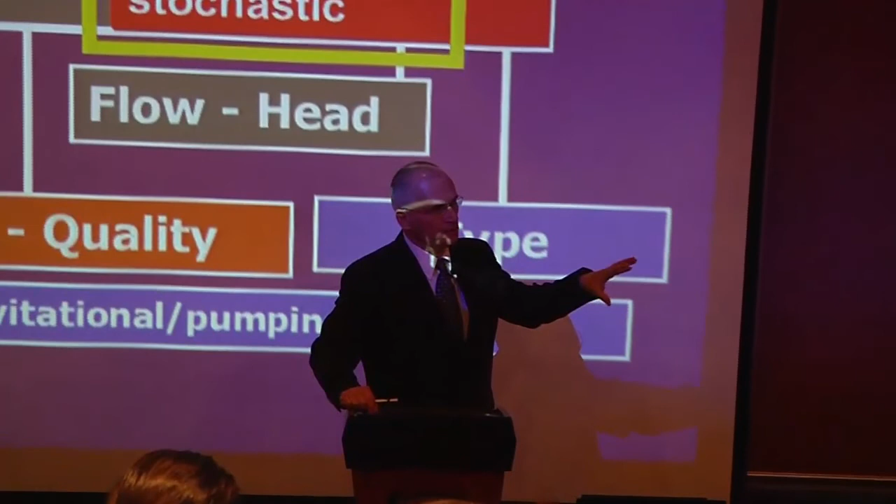The other thing I can say is that if you go back to the 1960s, when water distribution system design and operation started to evolve, people started from thinking about how to embed, how to do tricks to incorporate constraints. They were thinking a lot. In 1994, the first genetic algorithm model came out, a paper by Angus Simpson et al. Everyone who did water distribution systems was amazed, because suddenly the problem was not of great importance, because you had a tool that was able to solve everything.

I mean, you can do these two levels between simulation and genetic algorithms, and everything can be solved. So instead of concentrating on tailoring a methodology, there is a genetic algorithm, there is a vehicle, you can go on that vehicle and get a solution. To some extent it's very good, because you can solve real problems. On the other hand, it really reduces the pressure on anyone to think about the real properties of the system, and that's not a good thing, because you can do maintenance, leakages, everything using those two levels. This was in 1994, and I think nowadays, if you want to publish a paper connected to these two levels, it will be much more difficult than 10 years ago, because it's saturated.

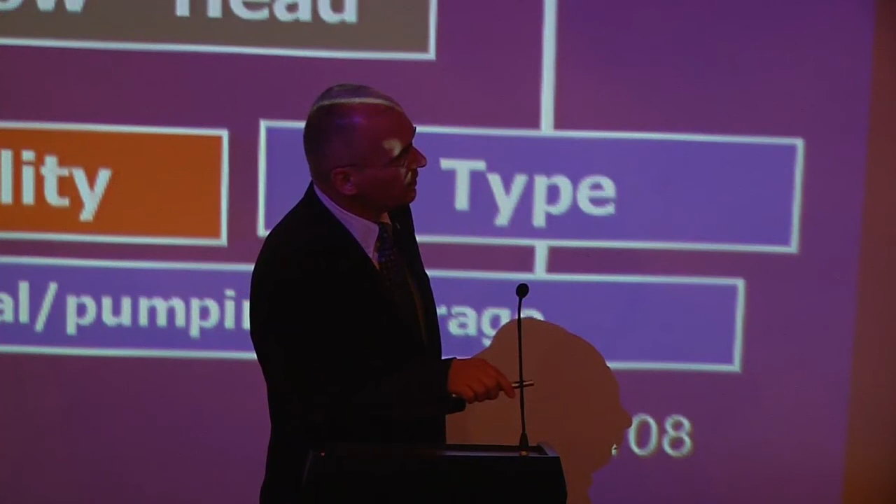So what's the point? You're doing again simulation and genetic algorithm. That's not innovative, that's not something people can really learn from. So that's very important—incorporating stochastic or uncertainty in models is one way.

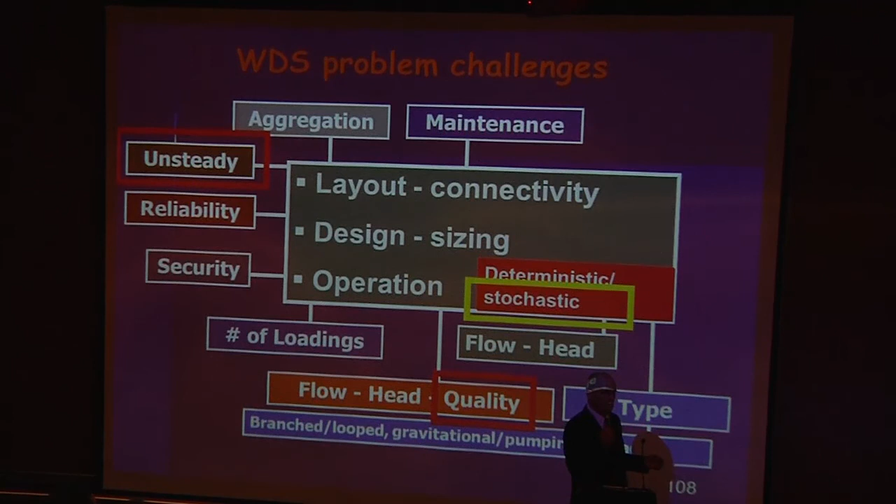The other thing which is completely unexplored is taking into consideration water quality issues and unsteady flow. If you have unsteady flow, it can go back into the system—there can be a reverse flow. How do you size surge devices in the water distribution system in an optimal way? Obviously it's not just one objective, not just the cost of the surge control devices—it's also the trade-off between potential damages from a transient and the cost, etc. Water quality issues connected to transients are also an issue.

So the message here is, if you want to do something connected to water distribution systems, and you say, okay, tomorrow at 5 o'clock in the morning I want to start doing something—then I think taking any of this map, any combination, water quality, unsteady flow, or any other problem, and incorporating uncertainty in a nice, intelligent way, are really challenges. That's the main thing.